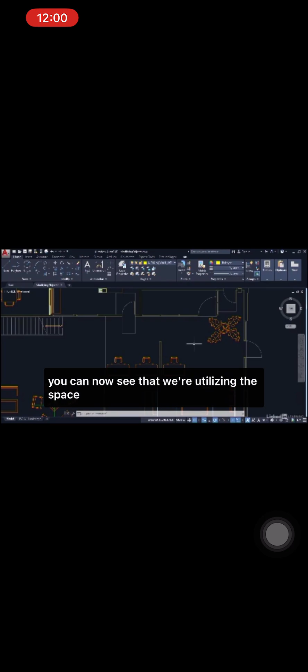You can now see that we're utilizing the space a bit more effectively in our new little hot desk office area in our drawing.

We're staying in our modifyingobjects.dwg file, still experimenting with our little hot desking area in the office. We're zoomed in close to the desks and the nice big plant we placed to give us some greenery. We're going to zoom in a bit more and use the stretch and lengthen commands in AutoCAD to tidy up the partition wall between the two desks. This desk here will be used as the reception desk, so the hot desking receptionist will sit there to book out the two hot desks on the other side of the partition. Let's zoom in closer to really see this partition wall we created previously.

Now we're going to go to the stretch command on the modify panel. It's here, this one. I'll click on stretch and come into the drawing area. It'll prompt me to select the objects I want to stretch. You need to use a crossing selection, not just click around them randomly. Position your pick box here and click and drag your crossing selection like that. As you can see, all three lines that form the partition wall are highlighted. Then left click again to confirm the selection.

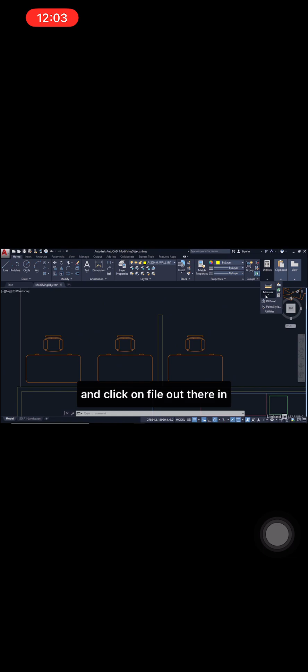You can check the length by going to the utilities panel, clicking the flyout, and selecting measure distance. Using your endpoint snaps, left click there and you can see it's now 2,000 long where we stretched it 500 to make it shorter. Click exit to come out of the distance command. We're now going to utilize the lengthen command.

This is a lovely little tool, on the modify panel - click the flyout here and pin it open first. Lengthen is just here. Click on lengthen and come into the drawing area. It'll prompt you to select an object to measure. Look at the command line - you've got delta, percent, total, or dynamic. These are all different methods of lengthening objects, especially lines, in AutoCAD. You want to lengthen it dynamically, so right click and select dynamic first, then select the object to change.

Be careful here - zoom in a bit closer, roll up on the wheel a few notches, and aim for the right hand side of this short line. Get the pick box there, click and drag to the right. Make sure your polar tracking's kicking in, and enter 1,500 millimeters, then enter. It will prompt you to select an object to change again, but we haven't got any more, so just press enter again to finish off the command. You can then unpin the modify panel.

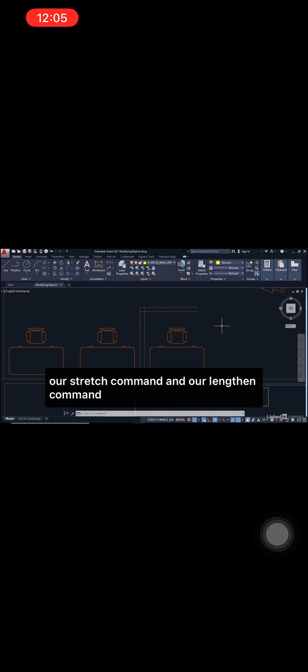And as you can see, that's utilizing now our stretch command and our lengthen command in our AutoCAD drawing.

Once again, we're staying in our modifying objects.dwg file, and we're going to have a look now at trimming and extending some of the lines on our drawing, just to tidy things up where we've created our internal wall partitions, and also to make sure things look neat and tidy. There's nothing worse, for example, than looking at a wall like this with these two little intersecting lines here.

Trim and extend are located on the Modify panel, on the Home tab on the ribbon, up here. If you click on the flyout, you can see trim has the scissors and extend has the little arrow. Older versions of AutoCAD don't have the scissors and the arrow, just so that you know.

So we're going to go to trim first. You click on the trim command, come into the drawing area. Now you have a choice with trim and extend. You can select your cutting edges and then trim the objects back to the cutting edges, or you can go for what's known as a dirty trim, where you use the select all option you can see on the prompt on the dynamic input. The first one we're going to do is with the cutting edges.

I'm going to select this line as a cutting edge and this line as a cutting edge, so you can then trim back those two little extension lines to make the corner of the internal wall look tidy. Press enter to confirm the selection. Then you select the objects to trim. If you hover over them, you'll see a little red cross, then you click, little red cross, then you click. Then it's enter to finish, job done. You've trimmed that corner nicely.

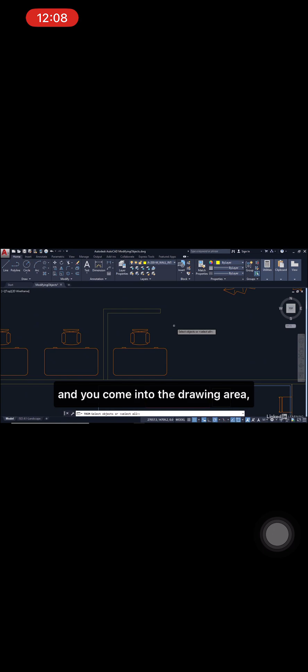Now what we'll do is trim again. We'll go back to the Modify panel, click on the flyout and select trim, and come into the drawing area. This time, just press enter. Don't worry about selecting any cutting edges. And it will say select object to trim.

So if we come down here, you'll see I can trim there. But notice I can trim anything - as I move around, anything that intersects anything, I can trim. So just be careful where you click with this one, it can be somewhat indiscriminate. We want that little piece there - it's a left click and then an enter to finish.

If you zoom out slightly now with a couple of notches on the wheel, you can see that little partition wall now looks really neat and tidy. And that's our little reception area for our hot desk area in the office.

We're now going to have a look at the extend command. If you roll back on the wheel a few more notches and then zoom in again, encompassing all of the office area, you'll notice there's a line here, and it says room separation - that's the layer it's on. Basically what it's trying to tell you is this is a room and over here is also a room. Bearing in mind this is a hot desk area, they're not going to want to hear all the noise coming out of the entrance hall of the office.

So the trick is we're going to extend our wall lines here up to this wall here. Now, again, with the extend command, you can have boundary edges, or you can just extend indiscriminately using the select all option, just like you can with trim. In this particular case, we want a boundary edge.

So we go back up to the flyout and select extend. Our boundary edge is going to be this line here that forms the wall. Press enter to confirm our selection. We're going to zoom in now and just select this line here - you'll see it kind of shoot off as blue like that. And this line here, click again.

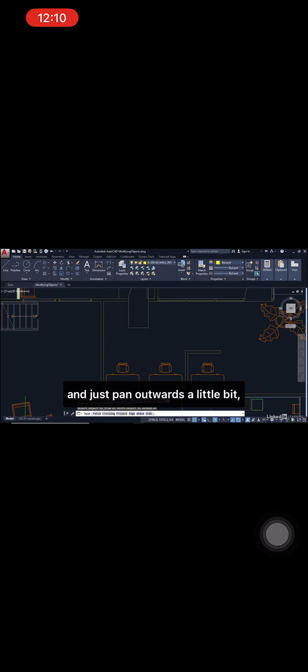We just need to tidy back to here and pan outwards a little bit, and that one there and that one there. Enter to finish. And we've now got a nice little hot desking area, nicely separated off with an internal wall.

Away from the loud noise in the reception entrance hall area there. So you can see how trim and extend are extremely useful for extending walls and objects, but also trimming back and tidying those corners and connections of those walls within this particular plan drawing.

Once again, we're staying in our modifyingobjects.dwg file. We've been working on this hot desking area in the office where we've placed the desks and placed the receptionist's hot desk as well. So you can see that's all looking nice, tidy and efficient now.

However, we don't have a door that allows us to go through this wall here into the entrance hall reception area. So we're going to have a little look now at the break and join commands available to us in AutoCAD.

Again, you're going to zoom in and get a bit closer to the wall so that you can see it more clearly. And we need to be looking at this wall here, this line here.

Now, the break commands are available on the Modify panel on the Home tab, but you do need to click on the flyout there on the Modify panel and pin it open to see them. So they're here. We've got the break, which selects the object and then breaks it between 2 points.

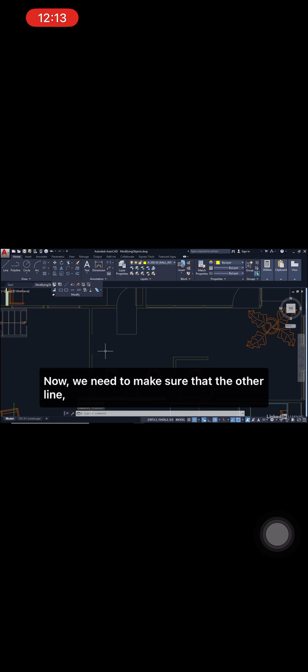Now, we need to make sure that the other line, this one, which is much longer, obviously has a break space that is 900 as well. So zoom in nice and close.

Make sure that you can see what you're doing. So there's our gap there for the door, and you've got this line here that needs to be broken at 2 points. Make sure that you've got your object snaps, object snap tracking, and polar tracking on. And you'll see what I'm going to do next is really rather clever.

Go to the Modify panel and click on this one here, just break. And it breaks the selected object between 2 points. So we click on break, come into the drawing area, and we're going to select our object, which is this line here.

Click on it, and it automatically assumes the first breakpoint will be where you've selected that line. We don't want that to happen, so right click and go to first point.

Now you hover over this endpoint here and drag across until you get the intersection and click. We then drag down again, hover over this endpoint, drag out to the intersection using the polar tracking and click. And we've got a perfect opening there for our door.

Let's just zoom back out a couple of notches on the wheel. So you've got your door space now. Now here's the fun thing about this.

Often when you're planning office space, the powers that be say we don't want a door there. This has happened to me many times working in facilities management, as a contractor, as a consultant. I've edited my drawing nicely and got my door opening there, and they say no, we don't want a door opening there. It's like, but I've used break to break those lines, and now I've got to tidy it up.

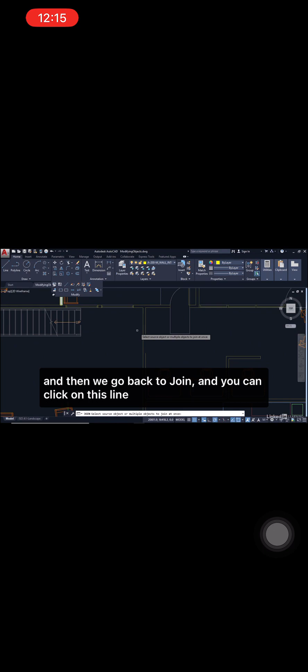If I select this line and then select this other line and press enter to confirm, it's now one line again. Then we go back to join, click on this line and this line, press enter again, and it's joined. It's a nice, quick, easy way of joining two coplanar objects together. Works really well, especially when people tell you they don't want a door opening in that wall.

We're staying in our modifying objects.dwg file, and you'll notice we've still got the modify panel pinned open on the ribbon. You can just unpin that now, and it'll go nicely back into the ribbon.

Now we're going to look at grips and grip editing. Double click on the wheel to zoom extents on the drawing so you can see the whole floor plan, then zoom in on the hallway reception area. We're going to look at these blocks sitting there - they're not really tidy at the moment. We'd like to make it a more welcoming environment for people coming in through these double doors. Zoom out slightly so you can see the entrance hall area. The piano itself really should be the feature here in the reception area.

So click on it and click on the grip, and using the grip it's going to come down here - you can click there and place it, then hit escape to deselect. Now zoom in closer so you can see what's going on, click on the piano again, click on the grip again, but this time when you right click you get a group of commands that are grip editing only: stretch, move, rotate, scale, mirror, base point, and copy.

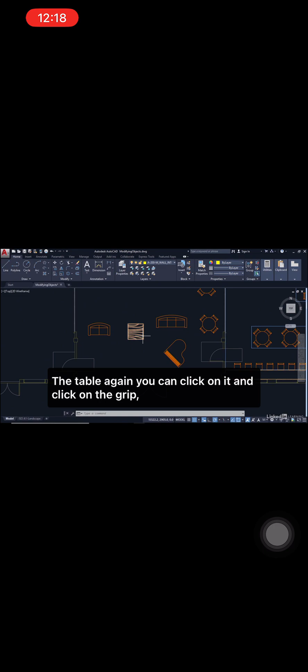Now when I zoom out a notch on the wheel, you can see the sofas need a bit of rotation, and this table needs repositioning. The table - you can click on it, click on the grip, and position it in the corner so that when people come in there can be magazines and perhaps some PR material for the company on the table. Hit escape, job done. Now you've got features when people come through the double doors - they see the table with PR material, they see the piano, and they think this looks nice.

So zoom out again slightly more, pan down a little bit more, and we're going to utilize the grip editing now just to move these. If I click on this sofa, click on the grip, right click and select move, I can move it to wherever I want it to go. I'm going to move it up a little bit, just there to the right.

Hit escape to deselect. Then the same with this sofa: click on it, click on the grip, right click, move, and move this one up here a little bit as well. Hit escape to deselect. Now it's all beginning to look much nicer and much more palatial.

The last thing we're going to do is utilize the grip edits, do a little rotate again. Select this sofa, click on the grip, right click, rotate, take it round to this 45-degree angle, click again, hit escape to deselect. You can do the same with this sofa: click on the grip, right click, and rotate it through this 45-degree angle, then hit escape to deselect.

So now when people come into the reception area, there is literally a reception area. You can sit on the sofas, you can sit around the tables here, you can even dabble on a baby grand piano if you wish.

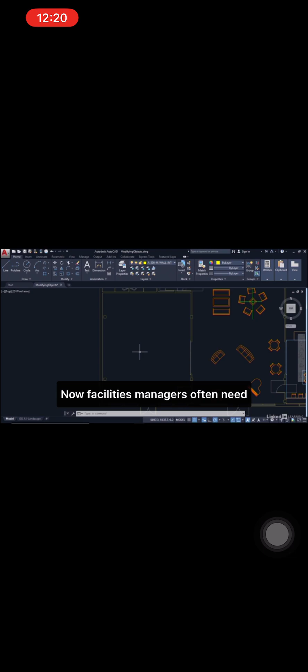Facilities managers often need to know the usable area of a room so that they can rent the room out, or work out what furniture and what people are going to go into the room for economic use of the room. Now, you'll notice there are these weird rectangles around doors in this particular office.

It's got nothing to do with the doors being weird, it's an access thing. These rectangles indicate how much space needs to be left to gain access to the door, and also the access around the door swing. So these rectangles indicate where furniture shouldn't go, for example.

Now, the boundary command will actually calculate the area of this room with the columns and the door opening and the rectangle around the door opening for me. It's a really clever command. You'll find it on the Home tab on the ribbon in the Draw panel. Click on the flyout here and select Boundary.

You can then come into the drawing and see the Boundary Creation dialog box. So you can see there we're picking points. Island detection is on, meaning it would find these little columns for me if I needed it to, so leave island detection ticked. The object type will be a polyline, but you can also make it into a region if you wish.

Regions are really for if you want to extrude things in a 3D environment. We can just utilize the polyline for now. The boundary set is obviously in the current viewport, so all we've got to do now is click on OK.

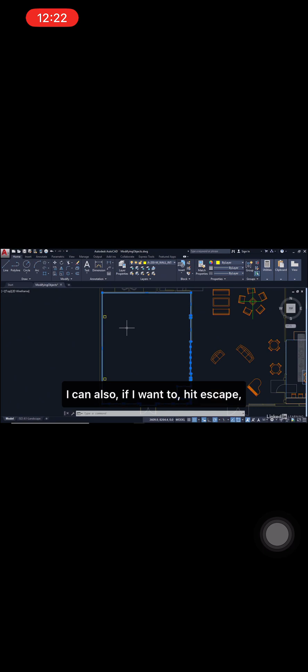I can also, if I want to, hit escape, and use the list command, press enter, and select the polyline that way. When you press enter again, you'll see on the command line there's the area and the perimeter. If you want to lose that expanded command line, just press the F2 key on the keyboard and it toggles it off again.

You'll also notice there's more information, so it's prompting you to press enter to continue. That's basically all of the coordinates of that polyline, all the vertices of the polyline, all the different XY values. So you can see how quickly and easily you can calculate an area using the boundary command in AutoCAD.

Once again, we're staying in our modifying objects.dwg file, in the same view as the previous video where we placed the polyline to calculate the area of that room in the bottom left corner of the floor plan. What we're going to do now is look at the fillet and chamfer commands, and apply them to some new boardroom tables.

First, we make sure we're utilizing the correct drafting layer. We go up to the Layers panel on the Home tab of the ribbon and select Make Current. I then click on a piece of furniture, and it puts me onto the layer that the furniture is on, so my new boardroom tables go on the right layer. Then we zoom into the top half of this room.

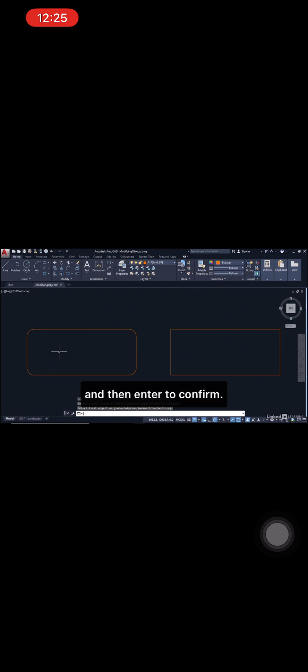That multiple setting allows me to go round and do each corner in succession. If I hadn't selected multiple, I would have had to go back to the fillet command for each corner, which is very time consuming.

However, even what I've just done is time consuming compared to what I'll do next. I'm going to undo what we've just done using undo on the quick access toolbar. Now, you can utilize a really cool polyline option within the fillet command.

I go back up to the Modify panel, click the flyout, and select Fillet. Coming into the drawing area, I right click, choose Radius, set it to 200 again, and press enter. Now you right click again and select Polyline, select the 2D polyline, click once, and it does all the corners for you. It doesn't matter how many corners it has—as long as it's a closed polyline, it'll add a fillet of that radius to every intersected corner. It's a really, really useful feature.

Let's look at a similar workflow, but this time for the chamfer command. Same flyout, but click Chamfer, come into the drawing area, right click and select Distance. There are two types of chamfer, distance and angle, and if you use Method on the shortcut menu you can jump between the angle or distance method. I'll select distance. The first chamfer distance will be 200, enter. The second chamfer distance will also be 200, giving me a 45-degree chamfer, so I can just press enter to accept that second distance.

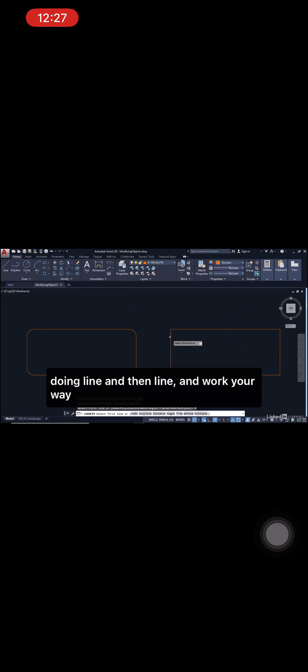Again, you can right-click and select Multiple on the shortcut menu, then go around selecting line and line, working your way around the corners like so. Obviously, this is time-consuming, laborious, and somewhat mundane—when I press enter, I'm done, but imagine if you had 15 corners to do: click, click, click, click. It takes a long time.

So again, I undo that, go back to Chamfer on the flyout, right-click, choose Distance, put in 200, enter, 200, enter. Then all I have to do is right-click and go to Polyline on the shortcut menu, select the polyline, and it does all the corners for me. If I zoom out, you can see how quick and easy it is to utilize fillet and chamfer when working with closed polylines.

We're staying in our modifying objects.dwg file, and we're going to look at the divide and measure commands in AutoCAD so we can start thinking about dividing some walls up to show the points where partitions might come off the main structural wall. At the moment we're still looking at those conference tables from the previous video, so you need to double-click on the wheel to zoom extents.

It's this wall here, down on the bottom left, that we're going to look at using the divide and measure commands. You want to ideally keep the polyline because that gives us the area of the room. The trick is this boundary polyline has been placed over the other objects. So select the polyline, right-click, move on the shortcut menu, pick a corner, and pop it over here somewhere. You can easily pop it back because we know this corner tallies up with this corner.

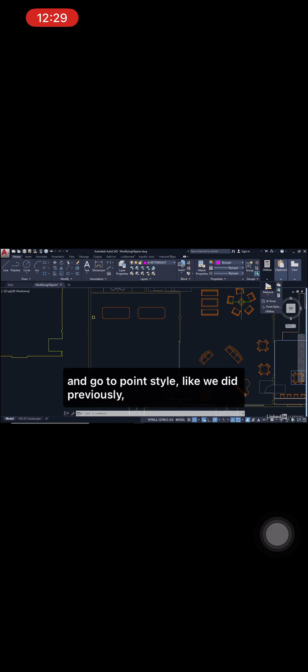So we're going to do a couple of things. We'll go to the layer drop-down in the layers panel and make sure we're on our setting out layer, A-setting out, first of all. Then we'll go over to utilities, go to point style like we did previously, and select a point style that we need to use and, more importantly, that we can see - that one there. Don't worry about changing any of the other settings, and click OK.

Now we expand the draw panel out here and pin it open, because divide and measure are here, like so. We want to divide this wall line into 4 equal segments so we can then have setting out points, or AutoCAD points, that mark where the internal wall partitions are going to come out from this wall horizontally into the room. So I click on divide here first of all.

Come into the drawing area, select the object I want to divide - this wall line here. Number of segments, as I said, is 4, and we press enter. And there's the points there where we can take our internal wall lines from.

Now you'll notice they kind of clash with the columns, so we might need to undo that. I'll undo it and go back to divide. This time select the line again and put 5 segments in. And that's better, because we've now got one there, one there.

We don't need to worry about the ones on the columns, because the internal partition walls will come off of those columns there and there. So now we know we've got these 2 points here that we can work with. And now I can go back to the wall line. I can utilize here my make current and I'll select that wall there, like so. All I've got to do now is draw some lines.

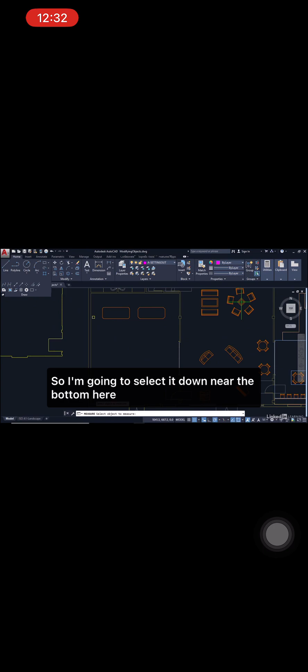Let's use measure. This time I'm going to select the object to measure, which is this line here. But remember to select towards the end of the line that you want to measure from, so I'm going to select it down near the bottom here. And then I'm going to specify the length of each segment.

I'm going to suggest 3,500. And as soon as I do that, if I just come out a notch on the wheel there, you can see that we've got 3,500 here, 3,500 here, 3,500 here, and then the remainder there.

If I'd selected this end of the line, it would have done it the opposite way. But the benefit again is if I zoom in now, you can see I've got those node snaps available off of the points that AutoCAD has created. What I can do is go to make current again here, select one of my wall lines.

Go back to the line command, come off of the node. Again, it's the same process, the 5,000 like we did previously, enter to confirm. I can then select this line, right click, copy selection, and you can then click on the node, copy to the node there, and press enter to finish, and you've now got 2 internal wall lines again.

So you can see how divide and measure can be extremely useful. But what you do need with divide and measure is a separate layer for setting out and also a good point style that stands out and is obvious in your AutoCAD drawings.

As usual, we're staying in our modifying objects.dwg file. We're going to have a little look now at editing polylines and splines in AutoCAD. Before we do that though, we're going to do a little bit of housekeeping. We're going to unpin the draw panel, so that goes back into the ribbon.

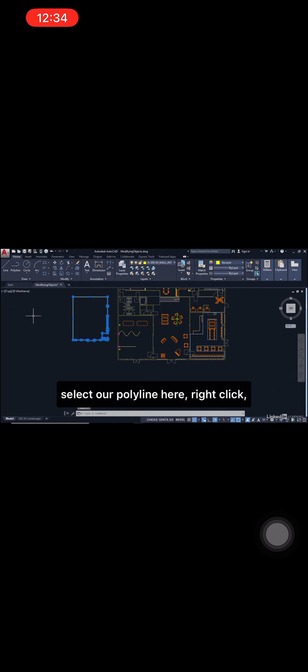Now, the other thing we are going to do is zoom out slightly, roll back on the wheel a couple of notches, select our polyline here, right click, select move on the shortcut menu, and take this endpoint here, the corner, and zoom in and take it to the internal corner here and click there to move it back to where it was originally. Then double click on the wheel to zoom extents so that you can see everything that's going on.

Now, zoom in again on your lower left corner, this room here. Get it to fill the screen like we've done in previous videos. And what we're going to do now is look at editing the spline first.

So if you want to edit a spline, the quickest way to do it is to actually physically click on it. It's that quick and easy. You can see there that I can utilize the grips, click, drag, and so on.

The other benefit I've got with splines is I can click on this down arrow here and convert it to a control vertices spline instead. And there's the control vertices, and I can click on those and drag them any which way to convert the spline to a different shape.

You'll also notice when I click on these points, I can stretch the vertex, add a vertex, refine the vertices, and I can even remove that vertex if I want to. Can you see it's removed it now from the spline? So there's a lot of editing tools that allow you to edit individual vertices and control points on splines. I'm just going to hit escape there now to deselect that spline.

Now, the other thing you can do, obviously, is edit polylines. We've got a polyline in place already, this big boundary here. So you can click on it to select it, and you'll notice there are all these grips going all the way around the polyline. You'll notice here that there are these funny sort of almost thin rectangular ones. They are midpoints on a line that forms part of a polyline.

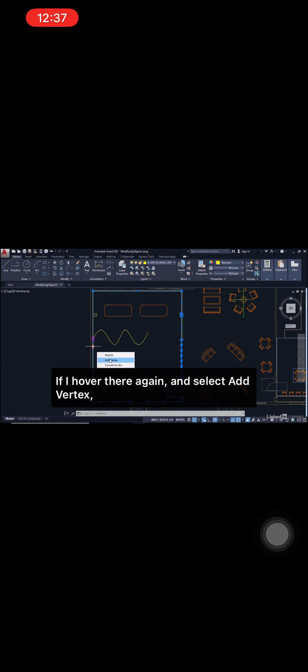If I hover there again and select Add Vertex, it'll prompt me to decide where I want that vertex to go. I'll place it further along this line, then hit escape a couple of times, select the polyline again, and you'll see I've got that one there. Can you see that's the midpoint? I've now got a new vertex there and a new midpoint because I've got a new line segment as part of the polyline.

Now it may be that you want to just convert some lines to a polyline. Hit escape a couple of times to deselect the boundary polyline and zoom in on one of the conference tables here, the one with the fillets. It's a polyline with nice curved corners as we did with the fillet command. Go up to the modify panel and click Explode. Select your conference table and press enter to confirm, and what you've now done is exploded it to its original AutoCAD objects, arcs and lines.

If you want to convert that to a polyline, you simply type PL, and can you see you've got a polyline there? Or if you type PE, it's polyline edit, or PEDIT as it's sometimes called. So you've got both there. It's very quick and easy to type them. PL is polyline, PE is polyline edit.

Select polyline edit from the shortcut menu, and now it says select polyline. Pick any arc or line, like so. It will say, do you want to turn it into one? Yes, obviously. Press enter to confirm, then select Join on the menu that appears, and work your way around. You can select the original object as well, just make sure you get all of the lines and arcs. Once you're done, press enter, then press enter again to close out the polyline edit command, and you've converted that back to a closed polyline. It's that quick and easy.

We're starting a new chapter now in our AutoCAD Essentials course, looking at hatching and gradients. And surprise, surprise, we have a drawing called hatchinggradients.dwg for you. You can download it from the library to follow along. It's a replication of the drawing from the previous chapter, and we're going to zoom in on those conference tables we created in the room in the bottom left corner of the building, and utilize hatching first.

Make sure you're on the A-hatching layer provided in this drawing. The idea is you put your hatching on a separate layer so you can freeze it or switch it on or off if needed. The hatching command is on the draw panel, so click on the flyout here and select hatch. As soon as you do that, you'll see the ribbon change dramatically and go to the contextual hatch creation tab.

We're just going to change a couple of settings here. We're going to utilize pick points, and make sure we use a pattern which is going to be ANSI 31, the default pattern anyway. Make sure you update your hatch scale to something in the region of 25 initially, just to see how that works. Then hover over the left-hand conference table and click, and you'll see that's quite a dense hatch, so we obviously need to change the hatch scale with that one.

So we'll undo that by right-clicking and undoing the last hatch, and it prompts us to pick an internal point again. Before we do that, double click in here, change our hatch scale to say 100 and press enter. Then you'll find when you hover this time, you're just starting to see the lines of the hatch pattern appear. Bear in mind this is a millimeters metric drawing, so we might need to take this up to somewhere in the region of 250 millimeters between each hatch line, and press enter.

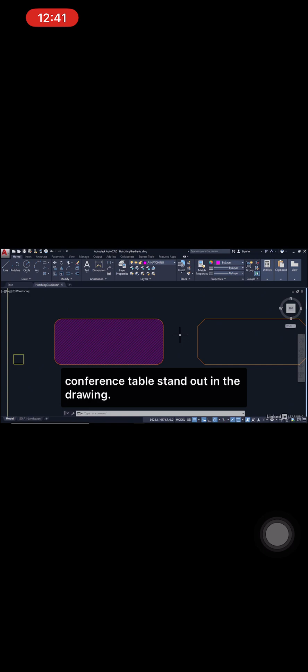Now, if you zoom in a bit closer on that, you can see that there's a nice hatch pattern there, albeit a little bit dense, but it does make that conference table stand out in the drawing. Just pan across now, and what we'll do in the next video is we'll look at how gradients work

We're staying in the hatchinggradients.dwg file, and you can see that I've left it in the same state as it was at the end of the last video where we placed the hatch pattern over here on this conference table.

We're going to look at gradient fills now, so make sure you're still on the A-hatching layer up in the layers panel, which you can see that we are up here. Now, with hatching and gradient, you can place them in a drawing to highlight areas. The good thing about the gradient fill, though, is you don't need to worry about the color of the layer that it goes on because it defines its own colors.

So if I go to the draw panel now, click on the flyout here, and instead of hatch now, I select gradient. Come into the drawing area and you'll see the hatch creation tab appears, but now we're working with gradient fills and you'll see they look subtly different with the blue and the orange.

Now, you can flip between gradient and pattern very easily here. If I click on this down arrow here and select pattern, that looks remarkably like the hatch patterns that we used in the previous video. That's because it is. And if I go here, I can select gradient and it just updates it that way.

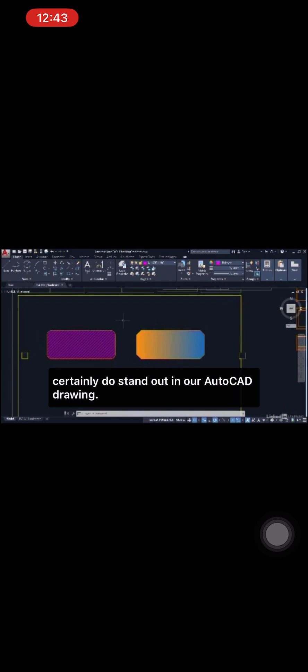And I'm going to go for the GR linear setting here in the pattern. Then when I hover, can you see you get a distinctive gradient between the orange and the blue? And when I left click, it places that gradient fill, press enter to confirm, and the hatch creation tab on the ribbon disappears. So when I zoom out slightly now, you can see that those two conference tables certainly do stand out in our AutoCAD drawing.

Editing your hatches and gradients in your AutoCAD drawings is actually very, very easy. We're staying in the hatchinggradients.dwg file, and you can see the hatch and the gradient fill that we've placed in the previous videos. All you've got to do in AutoCAD is hover over the hatch like that.

It will tell you it's a hatch pattern, double click on it, and now you'll find that you're in the hatch editor. Now, sometimes when you do double click on a hatch pattern, you may find that you get the quick properties palette come up.

Don't worry about that. You can close it like that very quick and easily. You can see that the hatch editor contextual tab is now available on the ribbon at the top of the screen, so it looks very, very much like the hatch creation tab on the ribbon. All that you're doing now, though, is you're editing the properties of your hatch pattern.

So the one property that I'm going to edit on the hatch pattern here, I'm going to double click there, change the hatch scale from 250 to 500, and I'm going to press enter, and you'll see those lines change accordingly in the hatch pattern. Once you're happy with that, you can go up to Close Hatch Editor here, and job done. You've edited your hatch. It's that quick and it's that easy.

It's the same with the gradient fill. Hover over it, you'll see it goes slightly grainy. Can you see that? Orange and blue, and then a paler orange and blue. Double click on it, and you may find that the quick properties pops up again. Don't worry about that.

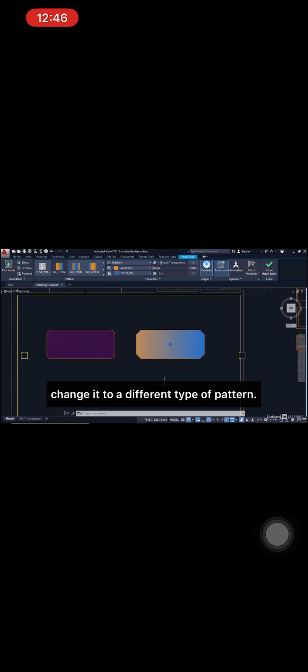Now the hatch editor has come up again for our gradient fill, and what we're going to do is change it to a different type of pattern. We're using GR linear at the moment. I'm going to change that to GR inverted cylinder, like that. And you can see the pattern has changed. I go up to close hatch editor, close it, and I've done the edit quick and easy on my gradient fill.

It's very, very easy to edit hatches and gradients in AutoCAD because as soon as you select them, like so, you'll see the hatch editor appear. Hit escape to deselect the hatch, hover over the gradient, click on it, and again it comes up very quickly and easily in the hatch editor tab on the ribbon. Just hit escape to deselect, and there you go. You have edited your hatch and your gradient fill very quickly in your AutoCAD drawings.

We're going into another chapter now in our AutoCAD Essentials course, and we're going to be looking at more text techniques in AutoCAD. In this particular video, we're going to be looking at aligning text in different ways, both single line text and multi-line text. The drawing is called usingtext.dwg, and you can see that at the top of the screen there. You can download the drawing from the library and use it to follow along with this video.

Just before we start, a good habit to get into is to make sure that you're on the appropriate layer for the work that you're doing. We're working with text, so you want to make sure in your layers panel that you are using the text layer. Make sure that text is the current layer when you're working with text. It's common sense, but it's very easy to forget, and then you've got to go around and change all the properties of all your text to a different layer. So try to get into the habit of making the right layer current before you start working on a particular aspect of your drawing.

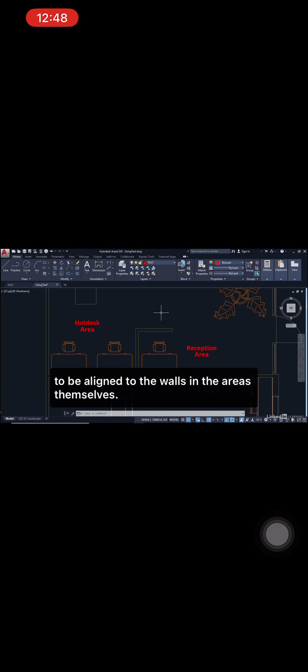We're going to zoom in first on our little hot desking area that we created previously in previous videos. You can see that we've got some text there now that says hot desk area and reception area. Ideally, we want the text here to be aligned to the walls in the areas themselves. So the hot desk area here, you'll notice both bits of text are single line text.

So we're going to select them both, and then I'm going to right click and go to properties. In the properties palette, I'll just move it over so we can see what we're doing. We're going to come down here and look at the text area of the properties. The justification at the moment is middle center. We're going to change that, click on the down arrow, and select middle left. As soon as you do that, can you see the text changes to a left-hand justification?

So all we've got to do now is close the properties palette. It's already selected. Quick right click on the mouse, click on move, pick a point on the text - doesn't matter which point - and just align it very simply with the wall. So there's our hot desk area aligned to the left to that wall there.

We're going to do the same with reception area here. We're going to select both of them, and then right click again like we did before, properties on the shortcut menu, scroll down to the text area, and change the justification this time on the down arrow to middle right.

Now, I've deliberately hidden this one just as a little bit of a surprise, and surprise, it's justified to the right for us. So you can close the properties palette, keeping the text selected, right click, and move, pick a point on the text, and we'll line this in with the wall over here, click there, and you can see we've got the reception area and the hot desk area all aligned nice and neatly.

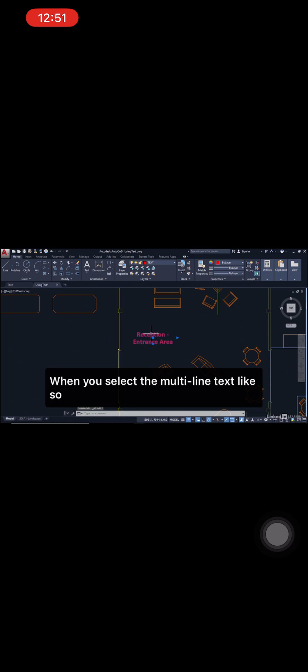To close the text editor, you can also just click away from the text if you wish. When you select the multi-line text, click there, click on the grip and just move it centrally, line it in roughly central there in the reception entrance area, hit escape a couple of times to deselect. You can see that's all nicely centralized and middle centered. And when you double click on the wheel to zoom extents, all of our text is aligned nice and neatly in our drawing.

We're staying in our UsingText.dwg file. And what we're going to look at now is aligning text in a title block.

Now, at the moment, we're in the model tab in our drawing. In the previous video, we aligned our text in our reception area, our hot desking area, and the reception area for the hot desking area. Those are the red pieces of text you can see in the model tab. What we're going to do now is stay with the text layer up here in the layers panel, but go to the ISO A1 landscape layout tab. If you zoom out slightly by rolling back on the wheel, you'll notice we've got a simple viewport showing a general arrangement of the floor plan, and a simple title block in place as well.

Zoom into the lower left corner of the title block like this, and you'll see that we've got a single line here, and it's on the layer title block. Now we're just going to use our text layer for this, and we're going to go to the annotation panel on the home tab on the ribbon. Click on the flyout for text and select single line text.

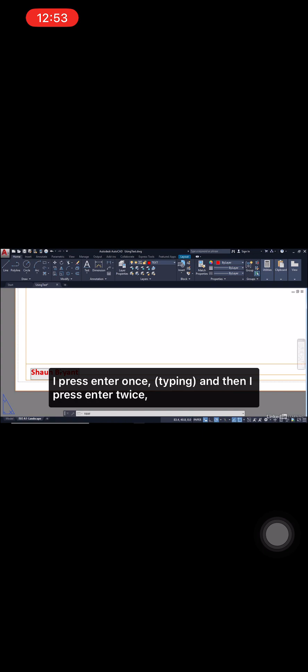Now, we haven't actually defined a height of text yet, but don't worry too much about that. What we're going to do is put our name in there, so we're going to name our drawing. Make sure you spell your name correctly, unlike me. There we go, Shaun Bryant there. I press enter once and then I press enter twice, and you'll see that that's placed the text nice and neatly on the left-hand end of the line, aligning it neatly in the title block.

Now, I've just used the standard text style as well there, and the text style I've been using, you'll find it here in the drawing. It's title layout 10, strangely enough. That's the one that is in the drawing, title layout 10. So make sure that you're using title layout 10 in your drawing when you're placing this text in the title block. Now that's just one of the text styles that's available in this particular drawing.

You could use other text styles if you wish, but just make sure that in the text style itself, you've got the appropriate height text for the environment in which you're working, whether it be the layout tab or the model tab. So there's our first piece of text, nicely aligned, single line text.

Zoom out slightly by rolling back on the wheel, pan across and zoom in on the bottom right corner this time. And what we'll do here is put training drawing as the other piece of text at the other end of the line.

So we go back to the annotation panel, click on the flyout, single line text again, right click again and select justify. This time we're going to justify to the right, and AutoCAD will prompt you for the right endpoint of the text baseline. So we use the endpoint snap and left click. Rotation angle 0, press enter to confirm, and you'll see your cursor there.

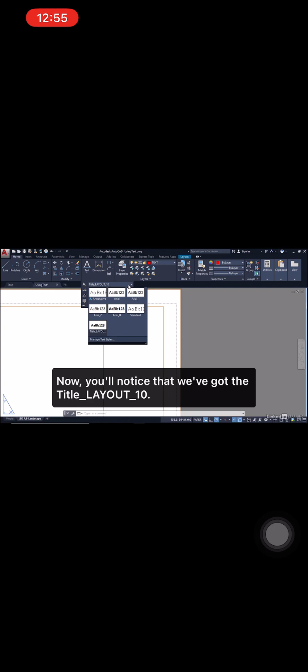Now you'll notice that we've got the title layout 10. I'm going to select title layout 10. And what you'll find is the text will be 10 high when I do this.

Now, the trick here is to edit or perhaps create a different text style. We can do that very quickly and easily. Click here and click up here for text style. And you can see we've got our title layout 10. Perhaps we need a different text style.

Perhaps we need something that says note layout 3.5. You'll notice that title layout 10 in the text style has a height of 10. It's predefined. That's why AutoCAD didn't ask for text height when we were placing those bits of text at the bottom of the title block.

So let's create a new text style, and we'll call the style name notes underscore layout underscore 3.5, and we'll OK that. So there's notes layout 3.5. The font style this time will be regular, and we'll change the height to 3.5. As you can see, that looks like that. We'll apply that, set it as the current style, and then click on close.

Now, we've done that deliberately so that our notes text is smaller. You can obviously experiment with lots of different text styles, but you can see how quick and easy it is to generate a new one if you need it.

I'm going to go to the annotation panel again, click on the flyout, and select multi-line text. There's the ABC of the multi-line text, giving a little preview of how big the text is going to be. Don't click exactly to the corners, avoid that. You want to click about here and then drag the multi-line text area to about there. Make sure before you start typing, you click here inside the editing area of the multi-line text.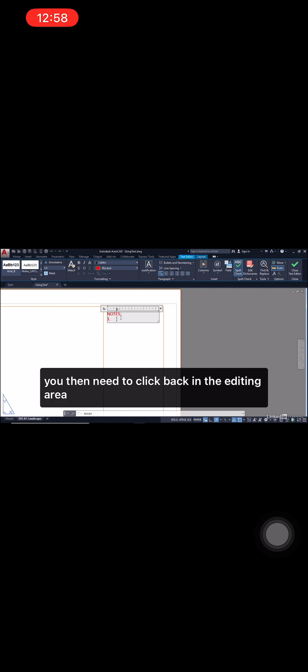Now you notice I started typing then, nothing happened. Remember, when you work in the ribbon, you then need to click back in the editing area to make sure that the editor knows that you're typing. Now when I type, can you see? It all kicks in. So I'm going to say all dimensions in millimeters, like so, full stop there, job done.

Click away from the text and the text gets placed. If I want to edit that, I just double click it. I can highlight that perhaps, make it bold, underline it, click away, and there's our multi-line text all neatly aligned as well in our title block.

Simply double click on the wheel now to zoom extent, and you can see your text neatly placed and aligned in your AutoCAD drawing.

We're starting a new chapter now in our AutoCAD Essentials course, and we're going to be looking at more dimensioning techniques where we can look at more dimensioning, but also more importantly, how we edit dimensions effectively and tweak them in our drawings to suit our requirements.

We've got a new drawing for you. It's called moredimensioning.dwg. You can download that from the library as usual to follow along with all of the videos in this particular chapter. Once you've got the drawing loaded up, we're going to zoom in on the top left quadrant of the drawing. You'll notice this time we've got grid lines and various lines that we can dimension to and from.

We're going to place a simple linear dimension from the end of this orange line to the end of this orange line here, first of all.

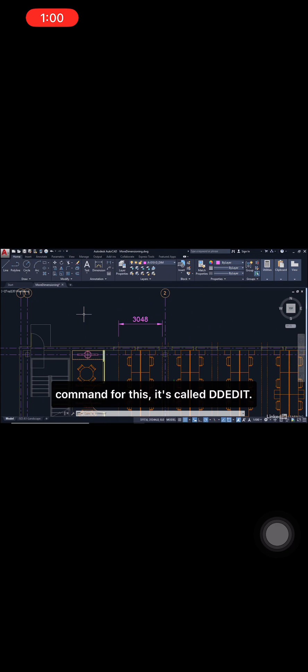So we're going to look at editing a dimension first of all. There's a really lovely command for this. It's called DDEDIT. You literally type DD and then edit, like so. And you'll see it come up on the suggestion menu, DD edit, text edit. It allows you to edit any piece of text annotation. It's a really clever command.

So if I click here, like so, it prompts you to select an annotation object. So you go and select your 3048 dimension. As soon as you do that, everything kicks in - your text editor up on the ribbon, your little cursor there, and so on. So what we can do is we can come over here now using the cursor keys. If I go to the end of the 3048, put a space in and put overall. So that is our 3048 overall dimension.

I can then close the text editor on the ribbon by clicking on the green tick, and that has updated our dimension. It's edited it quickly and easily. You then just press enter to close out the command. Now, that's great, and you can see that we've done what is in essence a text override in that dimension.

You can also do overrides in a quicker, slightly different workflow as well. You can select the dimension, right-click and go to Properties on the shortcut menu, and then you get your Properties palette. Now, if you just slide down the Properties palette to the text area here, I'm going to just move this over so that you can see the dimension. You can see there that we've got text override, bracket, bracket, overall. Now, the two little brackets represent the dimension, the 3048, and there's our text override, overall.

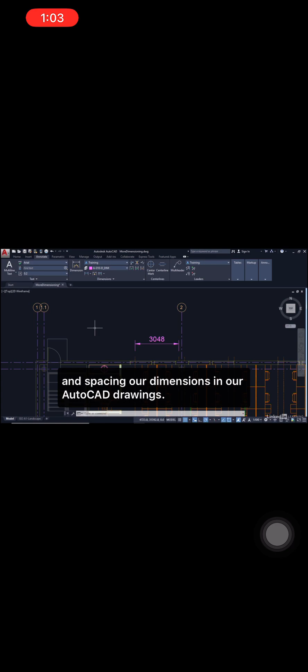We're staying in our moredimensioning.dwg file. And what we're going to do now is place a few more dimensions so that we can start looking at breaking and spacing our dimensions in our AutoCAD drawings. So we're going to make sure that our annotation scale down on the status bar is still at 1:100, making sure that we're in the Annotate tab on the ribbon, and we're going to utilize the Dimensions panel.

You can use your Dimension Layer Override here to make sure that you're using the A010 DDIM layer. We're just going to place a few more linear dimensions. So click on the flyout here, and you can select linear. I'm going to go with this endpoint here. It may show up as a node based on the 3048 dimension.

And then I'm going to come across to the intersection with the grid line here, click, and just drag upwards a little bit. Take that to sort of there, like so.

So it's above the 3048. We're then going to place another linear dimension, utilizing this intersection with this grid line and this intersection here with this grid line, bringing this one down really close to the previous one, like so. You'll notice that the spacing there isn't great. It all looks a little bit on top of each other.

So we're going to utilize the dim space command, which is on the Dimensions panel on the Annotate tab on the ribbon. It's this one here. You click on Adjust Space and select the base dimension, which will be the 3048, this one here. You then select the dimensions to space. I'm going to select this one and then this one. Then you press Enter to finish.

Now, there is an auto function here, like so. You can do auto, or you can enter a value. Bear in mind, you are in model space and in millimeters, so that's real - it's all 1:1. So you need to make sure you put in a sensible value, which in this case will be 700. 700 millimeter spacing, press enter, and you'll see that they now all space nice and neatly. They've got an equal space between each dimension.

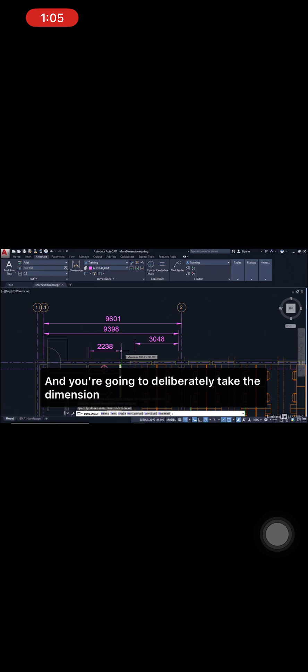So I want you to come here to another linear dimension, and we're going to dimension from this corner here, left click, and you're then going to dimension to this intersection here or this corner here - doesn't matter which. And then you're going to left click again, and you're going to deliberately take the dimension all the way through the other dimensions up to here.

Now, you wouldn't normally do that. It looks really untidy and it's not good CAD practice, but it's a perfect example of how you can use the dim break command.

Now, if I go to dim break here, you can click on the icon, come into the drawing area, and it says select the dimension to add or remove the break to. So I'm going to select the 9601, that one there - that's the one I'm going to break. And then I select the object to break the dimension, which is the one we've just drawn. Click here, and can you see it adds nice, neat little breaks to the horizontal dimension line there.

And I can select the object to break the dimension again if I want to. I'm not going to - I'm going to press Enter this time to close out the command.

Now, the lovely thing about this is if I want to unbreak that 9601 dimension, I can go to dim break again. I can select the dimension to add or remove the break, so that's going to be this one here. And what I can do now is right click, and you'll notice on the shortcut menu you can click on remove and it removes the break. You can then click here on the dimension that you don't want because it looks awful, I hasten to add, and you just hit the delete key and it's gone.

But can you see how that break command is extremely useful in tidying up your annotation on your drawing? If you have got dimension lines which cross each other, you can use the dim break command to add those breaks, basically to emphasize which dimension is which in your AutoCAD drawings.

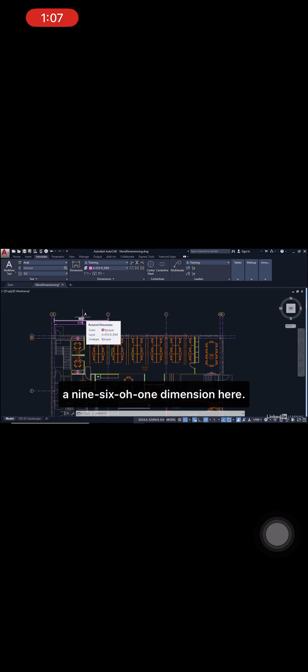Now you'll notice that we've already got a 9601 dimension here, and that's going from grid to grid - from the 1.1 to 2 grid there. What we're going to do is use the continue command to continue those grid spacing dimensions, and it's very quick and easy to do. It's on the dimensions panel here, on the annotate tab on the ribbon. Click on the flyout and select continue.

It will prompt you to select a continued dimension—that'll be this linear dimension here. Then as you come across, you just go to each point you want to dimension to, using the intersections there with the grid bubbles, enter to finish. It will prompt you, do you have another continued dimension to go to? Which we don't, so we just press enter and we're done.

Quick and easy. And the nice thing about that is the continued dimensions are all at the same level. You don't need to worry about aligning them or anything like that at all. It aligns them to the original dimension that you selected.

Another really nice tool in the same vein as continue is the baseline dimension. Now, I like this one a lot. It works really, really well, and it allows you to stagger dimensions in your drawings.

Now, we're going to go between grid lines 2 and 3. So zoom in a little here so that you can see a little bit more closely the points that you're going to snap to. We're going to use this orange line here as our baseline, and then we're going to dimension across to the right. Now, this is a really clever tool, and I think this works really well.

We're going to place a linear dimension first. So there's our linear dimension going from there to there. And I'll bring that to, say, there, like so.

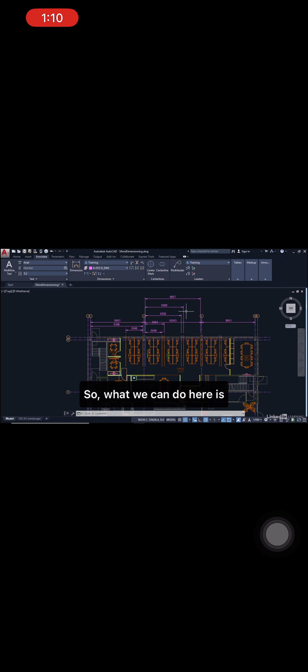Now, obviously, they're not as neat and as tidy as I would like them to be. So this is where we could potentially look at changing how our dimensions sit in the drawing. What we can do here is select our overall grid dimension, click on the grip there and take that further up this way, perhaps. Or what we could do is delete it completely and just have our baseline dimensioning in there.

Now, don't forget, things like grids can be updated as well. We can easily do a bit of moving and stretching. So let's make this look better now that we've got all those baselines in there.

What we want to do is take our grid bubbles and the text in them further up. So if we select 2 there, make sure you get the text as well in the bubble, because there's two elements to this—there's the text and the bubble, like that. And you need to zoom in on the 3 as well. So there's the 3 and the bubble, like that.

And what we're going to do now is move them vertically upwards. So it's a right click and a move. Pick a center point, like so—make sure you get a center of a circle there. And then using your polar tracking now, you can move these up and tidy it up. So keep the polar tracking in place and go up to, say, there, like that.

Notice the 9601 here updates with the geometry. So you might want to do your 1.1 bubble as well there at a later time. And then all we've got to do now is extend up our grid lines.

Now, again, this is just grip editing. Select it, click on the grip, and make sure that you come back this way, come vertically up, zoom in on your bubble. And as you come up with the polar tracking, you'll get an intersection there, or possibly even a node because of the dimensioning. And there's the first grid line extended.

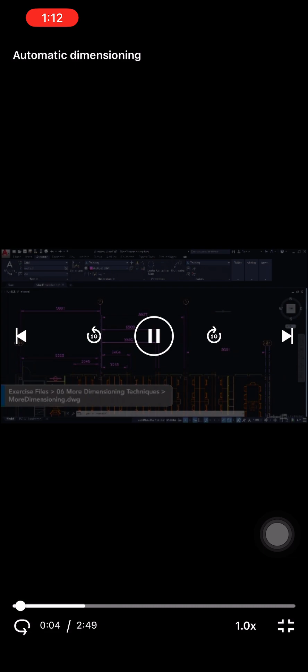We're staying in our moredimensioning.dwg file, and as you can see, we have quite the morass of dimensions all over that top part of our drawing now. So what we're going to do is remove some of the dimensions we don't really need for this particular video.

So these dimensions over here on the left, you can click on those three there, and they can be deleted. Hit the delete key, job done. Same with this dimension here over on the right. Hit the delete key, job done.

Now it's a little bit clearer, and we've just left the baseline dimensions in the middle between grids 2 and 3. What we're going to look at now is automatic dimensioning.

This command here on the dimensions panel on the Annotate tab—it's also on the Home tab, just here as well on the annotation panel. Jump back to the Annotate tab though, because it's a little bit easier to work with dimensions from there.

Now, this automatic dimensioning is very useful because it allows you to dimension different types of dimensions in the one session. So I'm going to click on it now. And if you come into the drawing now, it says select objects or specify first extension line origin.

Now we're just going to look at a few objects in the drawing. You'll remember the rectangles around the door openings. There's one here—let's zoom in quickly and just hover over it. And now, if I just hover there, can you see I get a little pick box? It actually automatically dimensions that line.

If I zoom out slightly now, I can take that dimension up a little and click, and I'm still dimensioning. I haven't actually finished dimensioning—it's now prompting me to find another dimension in this dimensioning session.

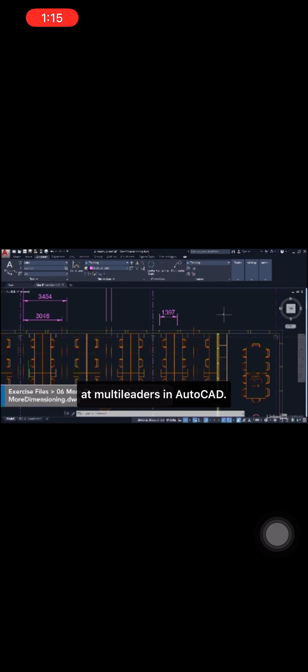They're on the Annotate tab on the ribbon, and you can see there's our leaders panel there, and there's the multi-leader command. Now, just before we get started, make sure that you're utilizing your dimension layer override here, so we're using the A010D_dim layer there. Also make sure that you're using the multi-leader style called training, this one here.

It's a nice simple multi-leader with a bubble and a number so that you can call off numbers against the multi-leaders in your drawings. So I'm just going to zoom out slightly here with a couple of clicks on the wheel and pan down a little.

So you can see the dimensions at the top of the drawing now, and you can see where we've moved the grids and so on and so forth. Now, multi-leaders allow you to individually pick out objects on your drawings.

And what I'm going to do is individually pick out this desk area here on the right. So you might want to now zoom in and relocate yourself. And basically, we're just going to place a multi-leader coming off of the large conference table here.

So making sure that we're using the training multi-leader style, click on multi-leader and just pick a point on the conference table. As you drag the multi-leader out, you'll see it comes out—can you see you've got a leader landing coming off of the crosshair there? So I click once, and it'll prompt you now for a tag number.

So this is like a little block with a circle and you've got a number in it, and that's the tag number attribute that it's asking you for. Just place 1 in there, click OK in the dialog box, and there's our multi-leader with our 1 in it.

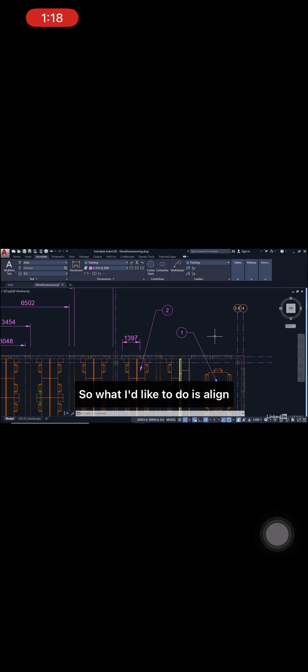Now those multi-leaders look a bit higgledy-piggledy, and obviously they're not level, and we'd like to align them. So what I'd like to do is align the 1 multi-leader with the 2 multi-leader. We can do that very quickly and easily here in the Leaders panel.

It's this icon here, Align. So you select the multi-leaders - there's the 2, there's the 1 - then enter to confirm, and you select the multi-leader to align to. I want them to align to the number 2 one here, and I can just move around using the polar tracking, line it in horizontally, left click. They're now neatly aligned, and we've got 2 different types of table pointed out by the multi-leaders.

Now there are lots of other multi-leader commands. You can group them together, similar multi-leaders, with collect. You can add a leader or remove a leader line from multi-leaders in your drawings as well. But as you can see, multi-leaders are versatile, quick, and effective. Make sure you've got a suitable multi-leader style in place, and you can annotate using leaders very quickly and easily.

We're starting another chapter now in our AutoCAD Essentials course, and we're going to be looking at reusing content in AutoCAD itself. So we've got a new drawing for this video, called Reusing Content.dwg, and you can download it from the library to follow along as usual. Now, the first thing we're going to look at with reusing content is groups and placing groups in your AutoCAD drawings.

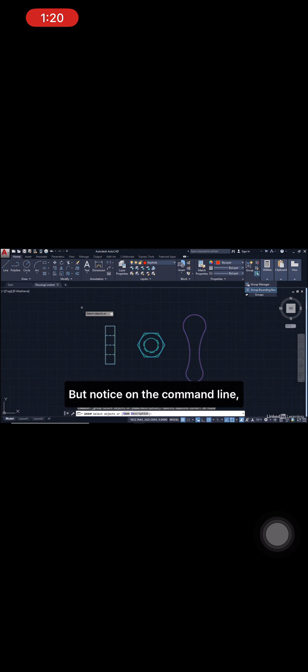Now there is a methodology to this, and it's important that you follow it, otherwise it can get a bit fiddly sometimes. So if you want to create a group, go to the Group command first, click here, come into the drawing area, and select the objects you want to go into the group. Click here with your pick box and drag a crossing selection over all the objects. Left click again - all the objects are now selected, but notice on the command line you've got name or description.

Right click and you can give your group a name quickly like so, and the group name will be Household, because they're all household objects - you've got a hinge, a bolt, and a keyhole. We're going to press enter there, and our group is now named. You'll notice on the command line, group Household has been created.

Now, the reason I've got you to do it that way is when you go into your Group Manager here, it'll bring up your group manager dialog box, known as Object Grouping. There's your group name there. Now if you hadn't named it and this box was ticked 'Include Unnamed', it would have appeared as an unnamed group. If that was unticked, you wouldn't be able to see your unnamed group in this list. So just be aware of that - it's quite important that you create the group first and then go to the group manager.

I can give my group a description, so we'll call it Household Objects, like so. And you can do things like highlight it, make it selectable. If you make it non-selectable, that means it's objects that people cannot select in a drawing - you might not want them to be edited, for example. You can remove objects from the group, add objects to the group, rename the group, and reorder groups.

What's really nice though is if I explode a group, keep an eye on the group name at the top of the dialog box - it disappears. When I click OK now, they're all just back to their original objects. They're not a group anymore.

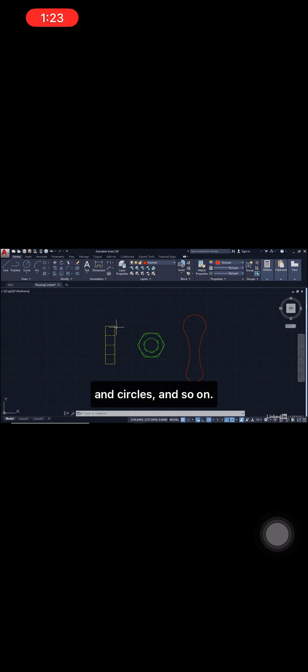We're staying in our reusing content.dwg file. Just make sure that you haven't got any groups set up, so you might want to use that explode group I mentioned in the previous video. You'll see that these are just objects made up of things like arcs, lines, and circles, so we've got a hinge, a bolt, and a keyhole.

What we're going to do is create individual blocks of these so we can insert them into our AutoCAD drawings. First, make sure that our current drafting layer up on the layer panel is 0. We're then going to select all of our objects and also put them onto layer 0.

Now you may think that a bit strange, but the whole idea is when you're creating blocks, if you put them onto layer 0, when you insert the block, it will then adopt the current drafting layer. So now I've put all of these onto layer 0.

I'm going to change that layer again because we're going to start on the hinge layer. Ideally, we want hinge to be the current drafting layer, even though all these lines are on layer 0 right now. Now to create a block, you can use the block panel on the Home tab of the ribbon.

Or you can go to the Insert tab on the ribbon, and there's Create Block there in the Block Definition panel. Personally, I prefer the Home tab because I've then got panels like Draw, Modify, and Annotation if I need them. So up here on the Block panel, I've got this icon, Create Block.

It brings up the Block Definition dialog box, and this one's going to be called Hinge, so we just type in hinge. We then pick a point for the base point of our block, so I click on Pick Point and utilize that midpoint snap - you click on Midpoint Snap. There's no way you could have guessed what those X and Y values were, by the way.

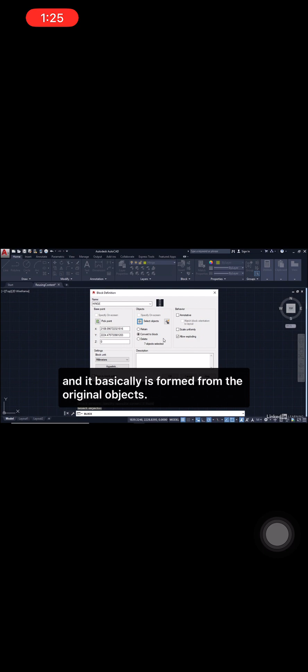If we use convert to block, it means the block stays exactly where it is, and it's basically formed from the original objects. Make sure that you scale uniformly in the X and Y direction, and make sure that you allow exploding, because you never know when you want to explode a block, change it slightly, and make a slightly different block. Our block units will be millimeters, since it's a metric drawing. We do not need to open it in the block editor, so make sure that's unticked.

When you click OK now, you'll see that it is now yellow using the hinge layer, and if you hover over it, it is now a block reference. When you click on it, it has one grip, which is the insertion point we selected. Hit escape to deselect, and it is a block.

Let's go now to the layer dropdown and select bolt this time, the green layer. We'll go to Create Block again in the block panel, and this time we give it the name bolt. We pick a point.

I'm going to use the center snap this time, like so. And select the objects — you click on select objects, make sure that all of the objects are selected, and press enter to confirm. There's the preview. Make sure you've got convert to block, scale uniformly, allow exploding, block unit millimeters, and make sure that open in block editor is unticked. Click OK — that is now a block. You click on it, you've got the one insertion point grip, and hit escape to deselect.

Again, layer drop down, you select keyhole. This time we go to create block, and again we put in the name, which will be keyhole. We pick a point, and you can use perhaps the center snap there, like so. Select the objects, again click, drag — make sure you use window or crossing selections to get all of the objects, and press enter to confirm. There's the preview, the objects are converting to block. Scale uniformly, allow exploding, millimeters, open in block editor unticked. Click OK.

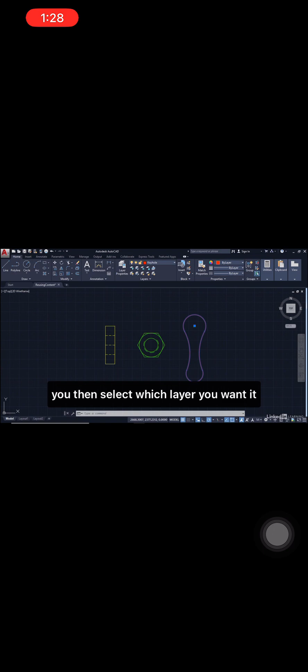So there's now our 3 blocks. You can see our keyhole block there with the single insertion point. Now the trick here is, depending on which block you want to insert, you then select which layer you want it to come in on. So now I can go up here, click on the flyout, and select perhaps the hinge layer. Hinge is now the current drafting layer, and you can now insert any of these blocks because they're in the drawing. Go to the block panel, click on the flyout here, and there's bolt, hinge, and keyhole. If you now select hinge, because that's the layer you're on, there's your hinge block, and you're reusing that content. So I can click there like so.

There's my hinge. Change the layer to bolt, go back to insert here — there's bolt, a bolt on the bolt layer. Change the layer now to keyhole, and again insert — there's our keyhole. And click like so. So every time you bring a block in, because it was created on layer 0, you'll find that it adopts the current drafting layer.

We're staying in the reusing content.dwg file, and you can see the blocks that we've already placed in the drawing, and more importantly, created within the drawing as well. Now, the explode command in AutoCAD is extremely useful if you want to explode a block reference back to its original objects, perhaps edit those objects, and create a new block.

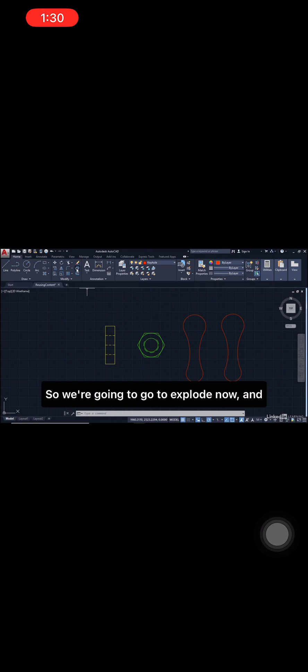Let's do that with also these two keyholes here as well. So we're going to go to explode now. What I'm going to do is kind of mislead you a little bit deliberately, as a lead-in into the next video. Select this keyhole here, press enter to confirm the explode, and you can see it goes back to the arcs on layer 0.

Select that arc and you're going to delete it like so. Then go up to the layer dropdown and select layer 0. Then we're going to click on the line command and place a line from endpoint to endpoint like so, and press enter to finish.

Now what we've done there is we've exploded a block, we've changed the geometry of the exploded elements that form that block. What we can do now is think about redefining the block definition. So let's say that we want our keyhole block, this one here, to now look like this one here. In the next video, we're going to cover how we redefine a block based on new geometry in the drawing. Let's end this video here, and we'll redefine our block in the next video.

We're staying in the reusing content.dwg file, left in exactly the same state as at the end of the last video. You'll remember I did a bit of a lead-in into this video previously, where we did the explode and altered the geometry of the exploded block, which is now on the white layer 0. Now we're going to look at redefining a block in an AutoCAD drawing.

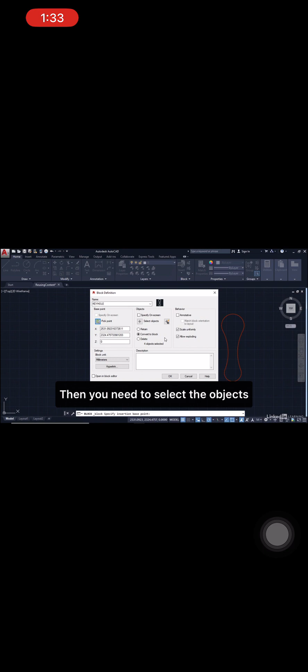At the moment, our keyhole block looks like this, and it's a block reference. Let's go up to the block panel in the Home tab on the ribbon and click on Create Block. You can redefine any block just by clicking on this flyout here - so there's keyhole. We can specify a new pick point and new objects. Let's go back to our pick point, utilizing the center snap, left click. Then select the objects that are going to create the keyhole block, just like last time, and press enter.

So there's our preview. We now need to convert to block again, like we did before - scale uniformly, allow exploding, etc. Make sure open in block editor is unticked. When we click OK, you'll get a prompt about redefining your block, and in this case, yes, we do want to redefine it. So we click on Redefine Block. You'll notice that this block updates with the new definition.

This is now a block as well, and it's only white because it's gone onto the current drafting layer. So select that block, put it on the appropriate keyhole layer, then hit Escape to deselect. So what we've done is redefine a block definition by exploding a block, changing the geometry, and redefining the block using the Create Block command.

We're going to look now at a slightly different way of reusing content in our AutoCAD drawings - utilizing the wblock command. We've got a new drawing for you called wblock.dwg, and you can download it from the library as usual to follow along.

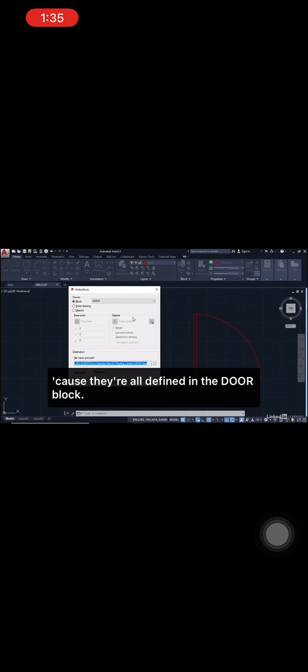You then need to define the file name and path where the DWG file is going to go. It might already be there, or if you want to change the path, click the button - I'm going to save mine to my 07 reusing content folder. There's door.dwg, an AutoCAD 2013 DWG file. Click Save - that's my path saved. I just check the units are millimeters, which in this case they are, and click OK.

You'll see a little flash top left of the screen - that's AutoCAD writing that block reference to its own door.dwg file. If I now go up to Open on the Quick Access toolbar, you'll see there is now a door drawing available. If I click Open, it'll open it. You may find the door isn't actually central when you open it, so just double click on the wheel to zoom extents, roll back a couple of notches, and there it is on the screen.

Now you'll notice it's all individual objects when you wblock out - there's a little polyline for the door, and an arc for the door swing. Just make sure you're on the same layer - on the layer drop-down, make sure we're on layer 0, as we've done already when talking about creating blocks. We're then going to draw a line - line command from the draw panel, go from this intersection here, left click, down to this endpoint here, left click.

You've drawn a line there, pressed enter to confirm, and then selected the arc and deleted it. So what you've done in the door.dwg file is created a different method of displaying the door.

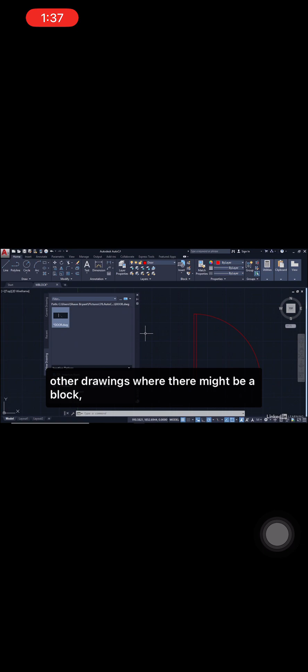Now this brings up this kind of strange palette that you may never have seen before. It's a new feature in AutoCAD 2020, and I really like this feature. It gives you a palette showing other drawings where there might be a block, recent drawings where there might be blocks, and the current drawing where there's a block. We're going to be using other drawings here.

If you want to change the location of your door block, where you're finding it, you click this button here, and there's my door block. I select it and click Open, and it applies that there to this little panel here.

Now I'm just going to bring the palette to the left so we've got a bit of space in the drawing. All I've got to do now is double click on this block. If I double click it, it'll say to me, door is already defined as a block in this drawing.

That's the door with the arc for the door swing. I now want to redefine the block from the door.dwg that I just saved with the line instead of the arc for the door swing. Redefine block - there's the new block.

Click once to insert the block, and it's redefined the existing block as well. If I had 700 doors in a floor plan in this drawing, all of those doors would now be redefined. And that's how quick and easy it is to utilize the wblock command in your AutoCAD drawings.

We're now going to look at creating a simple dynamic block. We have a new drawing for you called dynamicblock.dwg, and you can download that from the library as usual to follow along with the video.

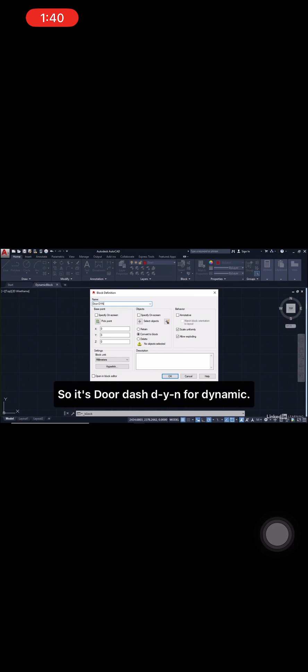Now all blocks have to have a name, so we're going to call it Door. What I do with dynamic blocks is give it a slightly different name, so it's door-dyn for dynamic. Now we're going to pick a base point for the door.

So we click on Pick Point and I'm going to utilize that corner there, left click. Then you need to select the objects that form the door. So you click on select objects, and the objects we need are the arc, obviously, and the polyline for the door, like so. You then press enter to confirm.

There's the preview of the block there. Now it says convert to block, retain or delete - leave it as convert to block, like we've done previously. We're going to scale uniformly and allow exploding like normal.

Block unit will be millimeters in this case, but this time we tick open in block editor. When we click OK, you'll see that the screen changes quite dramatically. We're now in the dynamic block editor, and you'll see the block authoring palettes here on the left. You'll see that we've got a block editor up on the ribbon with lots of tools and functionality, but we're not going to use much of that at all.

We're going to place a simple flip action on the door so that it flips from either side when we insert the block. Roll back just a couple of notches on the wheel, just so you've got a bit more space in the editing area.

Now, in order to create this flip action, we need to add a parameter and an action. So the parameters here, we need to select flip, like so, and come into the drawing area.

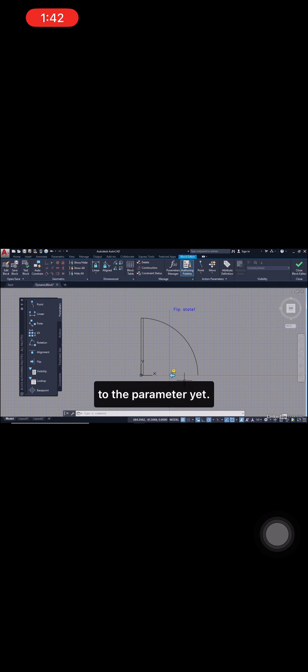We're going to also add a base point to our door. So there's the base point parameter there. Click. And the base point is going to go just on that endpoint snap there, left click. You'll see the little circle appear.

That just gives us a base point to work with. And then when we're inserting the block into drawings, it's got a base point, a known base point. A bit like when we create that base point for a regular block.

We now go to the Actions tab on the palette. And there's our flip action, like so. So we click on the flip action and come into the drawing area. Select our flip state 1 parameter. And then we need to select the objects that are going to flip.

And that's everything. So left click up here. And you'll drag your window all the way across, getting everything. You want to get everything selected. So click here, like so.

Make sure you've got that flip state 1. If it's not highlighted, perhaps do a crossing selection the other way. Left click, drag upwards like that, left click again. Just make sure that everything is selected in the drawing area, including flip state 1.

Then press enter to confirm. You'll see the exclamation mark disappear down here on the flip arrow, and you'll see there's your little flip action there, flip 1. So you've got everything in place now.

So what you want to do is close the block editor. Now, before you do that though, you can test the block. There is a test block option here. So if you click on test block, it'll take you into what looks like a drawing space.

We're starting a new chapter now in our AutoCAD Essentials course, and we're going to be looking at attributes and tables. So the first thing we're going to look at is attributes.

So we've got a new drawing for you. Surprise, surprise, it's called attributes.dwg. And as usual, you can download it from the library to follow along with the videos in this particular chapter.

What we're going to create is a setting out point for an AutoCAD drawing. So you can see we've got some lines and some circles there. They're all on layer 0. And you'll notice that we also have another layer called SOP metric in our drawing as well.

What we're going to do is we're going to stay on layer 0 initially until we create the attributes. And then what we'll do, we'll go to the SOP metric layer so the block automatically adopts the current drafting layer. Go to the Insert tab on the ribbon, and you'll notice in the block definition panel, we have a Define Attributes command.

That's what we want, Define Attributes. That'll bring up the Attribute Definition dialog box, and I'm going to pop that over to the left of the screen. We're going to create 2 attribute tags.

The first one of these will be the setting out point number. Now, attribute tags cannot have spaces, so I'm going to put SOP, like so, and then underscore NO for number. And the prompt will be SOP and then number. I always put a question mark because at the end of the day, it is a question. And the default here might be something like SOP 001, for example. That's an actual default value that will go into the attribute itself.

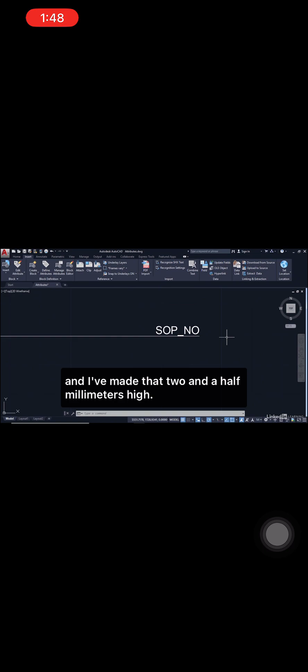Just like any piece of text, an attribute can be selected, right click, go to properties, and you can see the height there is 2.5. I'm going to change that to 200 and press enter. It'll be a lot bigger now. Close the properties palette, roll back on the wheel to zoom out, and you'll see that's a much bigger attribute now. Just hit escape to deselect it.

So just be aware of that height thing with your attributes. They basically behave in the same way as text. So if you're working in a metric millimeters drawing, and you place an attribute that's 2.5 high, that's going to be 2.5 millimeters, which is going to be a little bit too small.

We're going to go back to define attributes now here, like so. And this time we want an invisible attribute this time. We don't want it to show on the drawing, but we want it to be there as part of the block. So this time it will be a setting out point type. So I'm going to go SOP underscore type, like so.

Remember, no spaces in the attribute tags. The prompt will be, again, SOP type with a question mark. And we'll put SOP circle as the default value, like so. And what we're going to do is, again, make sure it's invisible. Insertion point specify on screen.

Justification this time, if I move this over here, will be top right. So let's just move that box over there like so. So we want top right this time. Text style standard, that's fine. Text height, make sure you make it the right size this time, 200.

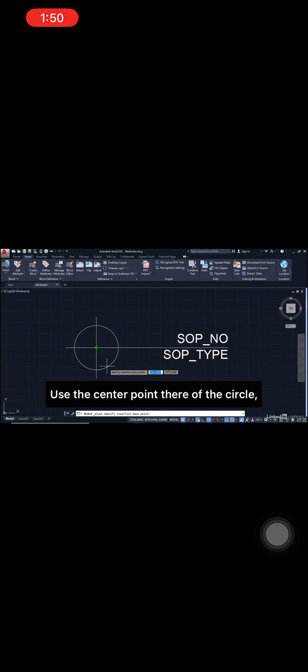So we go to the block definition over here and we go to create block. Just like we've done before in previous videos, this time we'll call it a setting out point, SOP, like so. We pick a point, so we click on pick point like we've done before. So you click on pick point and come into the drawing. Use the center point there of the circle, or possibly it might show up as a midpoint of those lines.

If you hover over the circle there, you'll see the center snap appear, and left click. Make sure you select the objects like so. You want everything selected, so a crossing selection: click here, drag over, click here, that selects everything. Then press enter to confirm the selection, and you'll see the little preview there as well.

We are going to delete this time, and make sure we scale uniformly and allow exploding - make sure they're both ticked. Block unit will be millimeters. We do not need to open it in the block editor - it's remembered that from the last time we used the block definition, so we'll untick that. Notice we've got delete set.

As soon as you click on OK, you'll find that your block disappears. It hasn't disappeared completely - we're going to go back to the Home tab on the ribbon. We're going to make our SOP metric layer the current drafting layer, then go to the block panel and click on Insert. There's our SOP block there.

We click and it comes into the drawing, so you can see it's got the default of SOP 001. When we insert it and click, it'll prompt us for the attributes we've set up on the block. So we've got SOP type, that's the invisible attribute, and SOP number, which we can change maybe to SOP 999. Click on OK, and that updates the attribute like so. It's that quick and it's that easy.

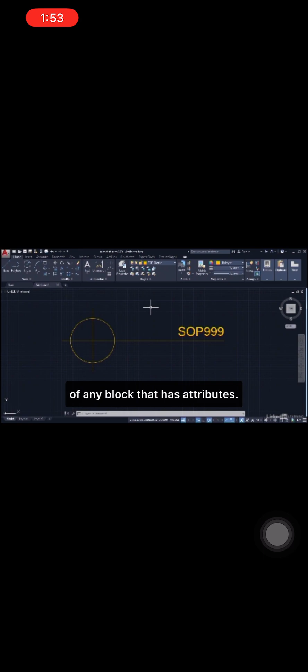We're staying in our attributes.dwg file, and I've left it in the same state as it was at the end of the last video. We've created our setting out point block with our attributes. You can see the SOP 999 attribute there on the block, and it's on the SOP metric layer. Now we're going to look at the enhanced attribute editor, which basically allows you to edit the attributes of any block that has attributes. It's a really nice feature of AutoCAD.

You can hover over a block with attributes, simply double click on it, and the enhanced attribute editor pops up. You can even go and select a block you want to click on and edit at any point in time as well. Now, the enhanced attribute editor allows me to basically edit any property of my attributes. So you'll see that we've got our SOP type - that's our invisible attribute, so that one doesn't display in the drawing, but the SOP number does.

So if I double click in here and change the 999 to 200, you'll notice that automatically updates on the screen. I click on apply. Thank you very much, job done.

Now I can also make sure I've got my SOP number selected and go to text options, which means I can now potentially change the height. If I make that say 250 in the height box there and OK that, you'll see that the SOP 200 gets bigger. I've clicked on OK though, which means I've closed the enhanced attribute editor.

Just double click on the block again and it comes back again. I'm going to select SOP number again this time and go to properties. Now the nice thing is I can change the properties of any attribute as well. Take note up here in the dialog box - it tells you the block, it tells you the tag that you're working on.

For example, I could potentially select SOP type and then go to properties, and I could change the color, but nobody would see it because it's an invisible attribute. So I go attribute, SOP number, then go to properties, then go to color and say red. That will become red. I'll apply it and I'll OK it.

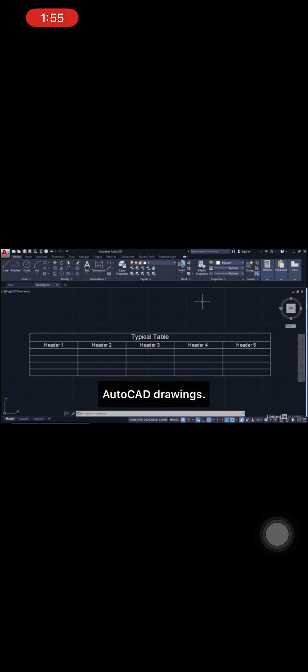We're moving into the tables side of things now, and we're going to be looking at table styles and how we create them, and how we work with tables in AutoCAD to generate information and annotate our drawings. So we've got a new drawing for you.

It's called tablestyles.dwg, and you can see we've got a typical table in that drawing. Simply download it from the library and open it up to follow along. In this table, we've got a title of 'typical table', 5 headers going across, and cells below to put information in. That's developed using the standard table style. But where do we find all of this information?

Well, tables are annotation, so if you go to the Annotate tab on your ribbon in AutoCAD, you'll see the Tables panel here. Mine's a bit squished, purely due to the resolution I'm working on to record the videos. If you want to work on a table style, click on the little 45-degree arrow here, and that will open up the Table Style dialog box.

It looks remarkably like the Dimension Style and Text Style dialog boxes we've used previously. If I click Close and go to the Home tab on the ribbon and click the flyout for annotation, you'll notice I can also get to table styles here, bringing up the same dialog box. I'll close that again and jump back into the Annotate tab, because it gives me a bit more scope to work with tables in the Tables panel.

Now, at the moment we have a standard table style, so that's all we're going to work with initially. What I do is click on the table command, and you see the table style is standard, we're just using that one. And we're going to start from an empty table.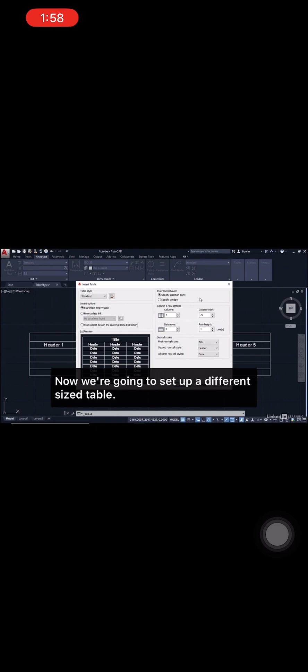Now we're going to set up a different size table. Instead of having 4 columns, we're going to have 6. The column width I'm going to make 100, and for data rows we're going to have 10. Now all of this is based on the preview down here, bottom left.

You'll notice we've got the first row cell style as the title. If I just bring the dialog box down a little, there's the title, there's the headers, there's the cells. That's what we're going to be working with - title, header, and then data cells. So leave all that information as is and click OK.

You will see your table floating on your crosshair. All you've got to do is roll back on the wheel a couple of notches to zoom out, and I'm just going to pop that underneath, like so. Click there, and it automatically brings up the text editor on the ribbon, and I can put the title of my table in there.

So this will be, let's say, Table 2, with a space in there, like that - Table 2. As soon as I press Tab, it will drop me to the first header, so that would be Header 1. Tab across, next one, Header 2, and so on and so forth.

And if you keep tabbing, it just tabs you along to the next cell and even drops down to the next row each time. All you've got to do there is click away from the table to confirm those settings, or you can close the text editor in the ribbon. So if I click there, my table is done - that's information going into cells in the table. Notice as well, I can double click to put information in and it'll automatically open the text editor.

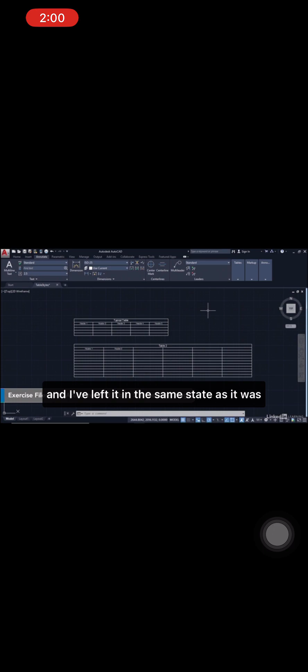We're staying in the tablestyles.dwg file, and I've left it in the same state as it was at the end of the last video. So you can see table 2 there, the one that we created using our standard table style. Simply select that table, and you'll see all the grips and all the tools that allow you to mess around with the table, and just hit delete there, like so. And we're going to zoom in on the typical table that was there when we first opened up the drawing.

What I'm going to show you now is how to design a table. Now, when I say design it, I don't mean give it all super duper chamfered and filleted corners and things like that, but just to make it stand out in an annotation way on your drawing.

Now, the table itself, obviously the header and title and things, you double click in the cell and you can edit the text. That's great, but what about editing information like background colors of cells and text colors of cells and things? Let's just hit escape a couple of times.

If I select the title cell and click once inside it, you see I get this kind of yellow pinky kind of background around it. And what that does is it takes you to the table cell tab in the ribbon.

Now, when it says cell styles here, I can now select a color. So if I go for a color there, let's go for like a pale blue and click there. Can you see I'm adding a background to that particular cell, which is the title cell? If I now click away, you see I've got that blue color, hit escape a couple of times. It makes the title of the table stand out.

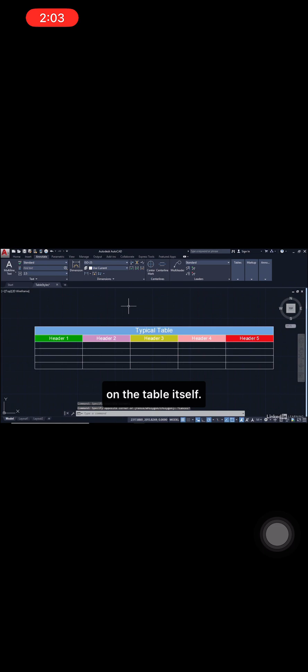Now that's obviously just the background color of the table. If I double click now inside the cell, I can change the color of the text if I wish. If I go here, I can make that red. Click away from it and you can see that's now red. So you can do it in the same way as the background color.

Now, select the table just on the edge, like so, and you'll see you've got many grips there. Just roll back on the wheel a notch so you've got a bit of space around your table. You'll notice you've got these arrows. If I click on an arrow, that'll uniformly stretch the table width. If I click there, it makes all of the columns wider. I can do the same here.

Click, drag, and do it that way, and it uniformly stretches the table both width and height. I can stretch this way as well, and as you can see, the rows get deeper. I can also click on this grip here.

This is the move table, so I can move the table wherever I want to move it to. You'll notice here, I can change column widths individually as well. Click on a grip, drag along, click. It makes that column wider, this column smaller. Click on a grip, makes that column wider, header 3 column smaller. Click away from the table, hit escape a couple of times, and you can see those changes that you've made.

So when you're designing your tables, you can see that you can add color, you can edit the text, you can edit the width, you can move the table, and you can also stretch the table as well. So there's a lot of functionality within AutoCAD tables. Use them for your annotation. They're an extremely useful annotation tool in your AutoCAD drawings.

So where it says polyline layer as the header, go down a cell in here and double click. You'll get your usual flashing cursor as if it's expecting regular text input in that cell. Look at the text editor tab in the ribbon and look at the insert panel, and you can see there's a field command. Click on it. And you'll find that you now get this great big field dialog box, which looks a little bit confusing. Don't be daunted by it.

Click on the field category here and select objects. And you'll notice it rationalizes that information quite quickly. Select object in the field names, and the object type now needs to be selected. We've got a select objects icon. So you click on select object and you're going to select the rectangular polyline. Just click on it once and you'll see that you've now got all the information about that particular polyline. In this particular column, we want the layer that the polyline is on, which is the polylines layer. Click on OK, and you can see now that you get a field giving you the information about that polyline.

Now, it's got a kind of grey background to it. Don't worry about that. That doesn't plot. That's just letting you know that that's a field in your table cell and not just a regular piece of text. So, click away from the table, and you'll see there's your polylines layer in the cell in the table.

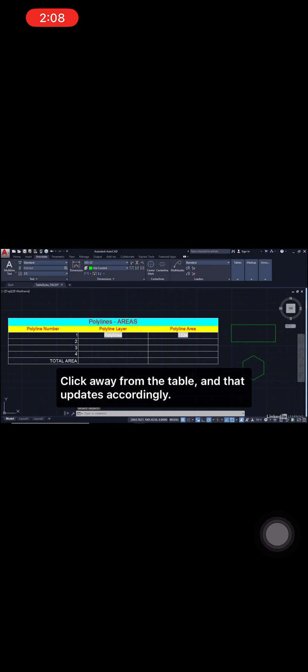Let's repeat that now for the little hexagon polyline. So it's a double click in this cell, go to field, select object, select the hexagon, select layer, and again it's polylines, click on OK, and there's polylines in the cell. Click away from the table, it updates the table.

Double click in the corresponding area cell, and again click on field, select your hexagonal polyline, so select object first, then select the hexagon. Again, we've got area, we're using precision of no decimal places, it's remembered that, and it's 779. Click on OK, and it adds that information. Click away from the table.

Now, it may be that we want to total up the areas and put it in this cell here. Click once in the cell, and you'll notice now that you've got formulas in the insert panel in the table cell tab on the ribbon. So click on the flyout for formula and select sum. Now we need to click and drag over the cell range that we want to add together. So it's a click and a drag and a click again, like so.

And you can see it's adding up C3 to C6, column C. All you've got to do now is close the text editor, top right on the ribbon, and there's our added up value, but it's gone to 4 decimal places.

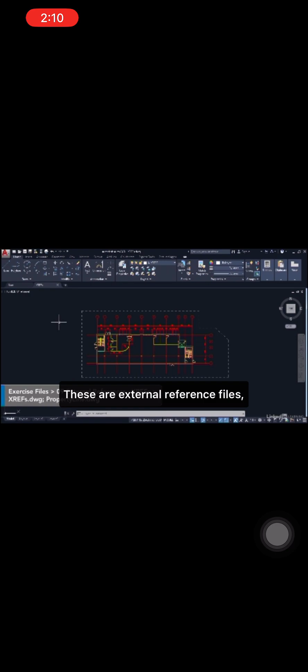We're moving on to another chapter in our AutoCAD Essentials course, and we're going to be looking at what is known as XREFs, external reference files, often abbreviated to the phrase XREF. What you can do is virtually paperclip a drawing onto a host drawing and use it as a reference, hence the term external reference.

The major benefit is if your referenced drawing, your XREF, is a complicated drawing and you're paperclipping it to your host drawing, it's only going to be roughly 10% of its original size. It'll only make the host drawing about 10% bigger instead of doubling the drawing size. So it's a really useful piece of functionality purely due to file size.

It's also great because you can reference in other drawings that other people are working on at any given time. The benefit is that if a drawing updates, the reference file will update, so in the host drawing you've got the most current information that you need.

So we've got a new drawing for you for this chapter. It's called xrefs.dwg, you can see the name at the top of the screen. You'll notice we've got a floor plan laid out, and we've also got a dashed line going around it - that's the property line.

Now what I'd like you to do is click on that dashed line. As soon as you do, you'll notice the ribbon changes and goes to an external reference tab, and you can edit the reference in place, open the reference, create a clipping boundary, remove a clipping boundary, and look at external references. You can see it's one whole object, not just a polyline using a dash line type.

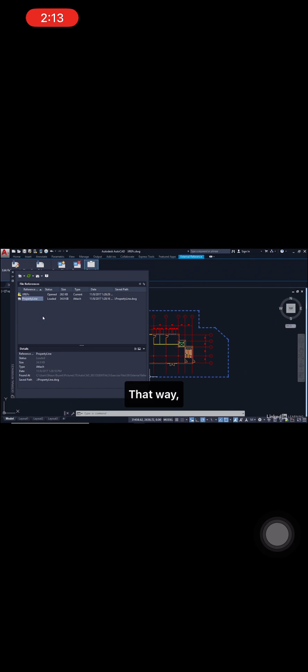You'll find this particular XREF is called property line, and that's the other DWG that you've got in the library when you download your XREFs DWG. So you want to make sure you download both files from the library and put them in the same folder. That way, when you open up XREFs, the property line reference file is referenced in accordingly.

And it's a relative file path - that's what this little dot here means. When I say relative file path, that means it's in the same folder. AutoCAD will look for the reference file in the same folder as the host drawing.

Now, the way you can tell which is which: the host drawing is always the blue and yellow icon, and the reference drawing has a DWG icon, a little black and white DWG icon. If you look closely, there's a little blue paperclip on it as well, because the idea is that this reference file is paperclipped to your host drawing.

And what you can do is right click on it and open it, attach it, unload it, reload it, etc. Now, what we're going to do in this chapter is look at what we can do with these reference files and how they are of use to you when working in your AutoCAD drawings.

So just hit escape a couple of times and then close the external references palette, then hit escape to deselect your property line reference file, and you'll go back to the regular AutoCAD ribbon.

We're staying in our xrefs.dwg file, and we're going to have a look at attaching an xref file to a host drawing. Our host drawing is called xrefs.dwg, and our reference file is called propertyline.dwg. We know that from the last video when we went into the external references palette.

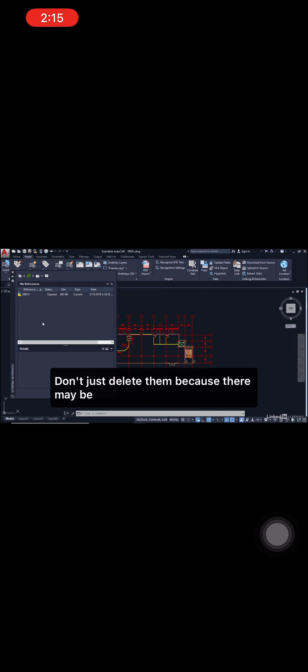The idea is that we're going to detach the property line from the xrefs.dwg file. So select property line in the palette, right click on it and hit detach. That will remove the reference file. That is the preferred method of removing any xref from any host drawing. Don't just delete them because there may be a path left behind.

If I close the external references palette now, you can see that we are left with only the information in the xrefs.dwg file. If I go back to the Insert tab on the ribbon, back to my reference panel, and click on the little arrow again to open up the external references palette.

I can now go up to the top left here and click on the flyout and select Attach DWG. You'll notice there's lots of other types of files that can be attached as reference files, like images, PDFs, point clouds, and so on. We're using a DWG, so you click on Attach DWG. We want the property line DWG file, that's our reference file, so you select it and click Open.

You'll then get the Attach External Reference dialog box with the name of the reference. Notice here we've got two types of reference: attachment and overlay. If I hover over the word overlay, it gives a tooltip. Basically an overlay, unlike an xref that is an attachment, is ignored when the drawing to which it is attached is then attached as an xref to another drawing - so you're xrefing and then xrefing again. The overlay will not be displayed, whereas an attachment will be.

Now we're just going to set the scale and the insertion point, the path, etc. Scale X, Y, and Z need to be set to 1, untick specify on screen. Same with insertion point - untick specify on screen, and X, Y, and Z need to be 0 because our origin is 0,0 for this reference file. Path type will be relative, the preferred path type, meaning the property line reference file will be in the same folder as the xrefs.dwg file. You can also choose full path or no path, but relative path is the preferred method.

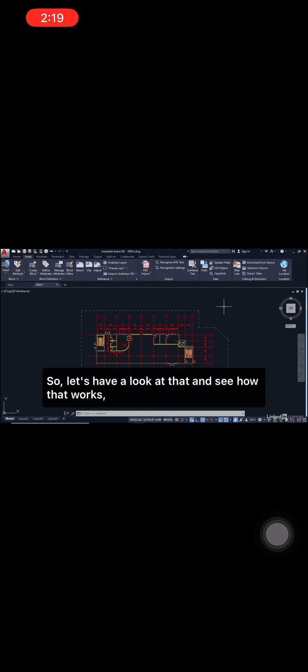I can use clip here, and you can see I can clip a block, an externally referenced file, or a viewport to a specified boundary. So that means I can clip an xref to a specified boundary. But there's actually a quicker way and a nicer workflow, which is a bit more direct.

If you simply select the xref, clicking on the property line, you'll notice on the External Reference tab that pops up on the ribbon, I can create a clipping boundary there and I can remove a clipping boundary. Click on Create Clipping Boundary.

When you come into the drawing area, you've got a choice. You can select an already existing polyline if it's there, or you can make it polygonal, or you can make it rectangular, and you can invert the clipping boundary as well. We're going to go for polygonal.

What this allows me to do is draw a polygonal clipping boundary. Just watch what I do on the screen. If you click here and drag, using your polar tracking, you can position a boundary going around like so. I'm not doing anything special, just something very simple.

I'll go and hover over that point there and just bring it down like so. It doesn't have to be perfectly vertical or anything like that. Click there like so, and there's our boundary. Now, as I come up, I can bring that in there, and I can close it by snapping to a point if I want to, or I can just click like so. So as you can see, there's our boundary there.

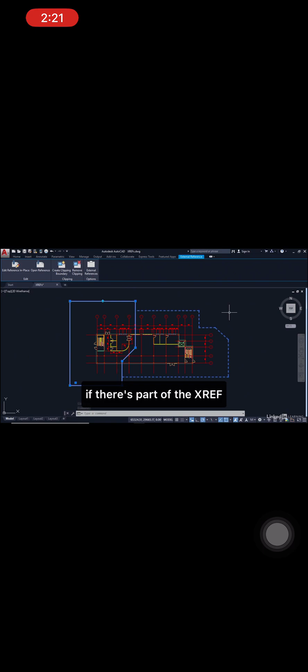Now, the nice thing about this is I've got a little arrow here. If I click it, I can invert the boundary. Can you see? So there's the polyline forming the clipping boundary, but the XREF is showing over here. I've inverted it. If I click it again, it brings it back inside the boundary. So you can have a boundary and then click to show something outside the boundary instead, if there's part of the XREF that you don't want to see.

Obviously, if you don't want the boundary there anymore, you simply go to Remove Clipping, and with the boundary selected, everything goes back to normal. Hit Escape to deselect the XREF, and you're done. It's that quick, and it's that easy.

Clipping XREFs is a really, really useful facility in AutoCAD. You don't have to see the whole XREF in the host drawing. You might only need part of it. So utilize those clipping boundaries to your advantage.

We're staying in our xrefs.dwg file. As I mentioned previously, other people can be working on an XREF that you may have inserted as a reference drawing in your host drawing. So our property line, our dash line - someone else could be working on that drawing and load it in as an XREF into our host drawing for us if need be.

What you can do is edit XREFs very quickly and easily in that way. Then the next time you load up the drawing, you know you've got the most current information from all your reference files. So we're going to do this kind of locally, as if we're two people.

So I'm going to go up to Open here. And when I go to Open, I can open up my property line DWG file, which is being used as a reference file. I'll click on Open and just zoom out slightly there by rolling back on the wheel. So you've now got your dashed line that represents your property line open in its own DWG file.

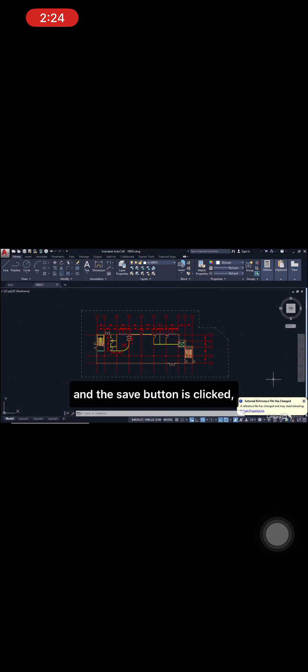As soon as that reference file is changed and the Save button is clicked, that's what happens. So now I can reload my property line reference and you'll see it updates with the right angled corner.

It's really useful because other people can be working on other drawings, which saves you time. You don't have to work on all the drawings at once. The change has been made to that property line reference file externally, and your host drawing has said, hey, a change has been made, you need to reload the XREF file, which is what we've just done. That's how quick and easy it is to edit XREFs and get them reloaded back into the host drawing.

Once again, we're staying in our xrefs.dwg file. I've left it in exactly the same state as it was at the end of the last video, where we've made that change to the XREF file and added that right-angled corner to the property line. What about, though, if we can edit our XREF files in place as well, which can be done?

Simply select the reference file, which is our dashed property line, like so, and that'll take us to the external reference tab on the ribbon. Now, we've looked at clipping boundaries and we've looked at options with the external references palette. Here's the edit in place. So I can open the reference file there and go edit it as a separate DWG, or I can edit it in place. Click on Edit Reference in Place.

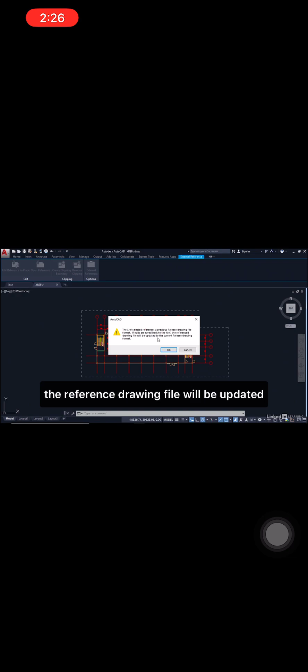Now it references a previous release drawing file format. What it's letting me know is that the propertyline.dwg file has been saved as an older DWG file format, which I always do for all of these videos anyway. I save back to 2013 DWG, whereas the latest version of AutoCAD we're using to record this course uses a 2018 DWG file format as a default. So it's saying if it's an older version, and edits are saved back to the XREF, the reference drawing file will be updated to the current release drawing format. Be aware of that - it'll go to a 2018 DWG file format. I'll click on OK there.

What it does now is it grays out the host drawing and highlights the reference drawing. You'll see now that the ribbon has changed. I've got some options now where I can save the changes, discard the changes, add information to the working set, or remove information from the working set.

What I'm going to do is now just change this corner here on the polyline. So I'll go back to the Home tab on the ribbon, and I'm going to create a chamfer, right-click and select a distance, and that distance is going to be 2,500. Enter. And the second distance will also be 2,500. Enter. And I'll select my first line here, so it's left-click and left-click. There's my little chamfer on the corner.

So I've now edited that reference in place while it's referenced into my host drawing. If I go back up to the ribbon now and click on the flyout here, you can see I've got save changes or discard changes. I'm going to save the changes, like so - all reference edits will be saved. Click on OK, and you can see now that my corner has been updated in place in my reference file.

So you've got two choices: you can edit in place, like we've done in this video, or someone else can be editing that reference file elsewhere, and as soon as they save, you'll get that little prompt at the bottom of the screen telling you to reload the reference file because changes have been made. So there are ways and means of updating your reference files quickly and easily, whether that be remotely or locally, like we've just done, where we've edited the reference in place.